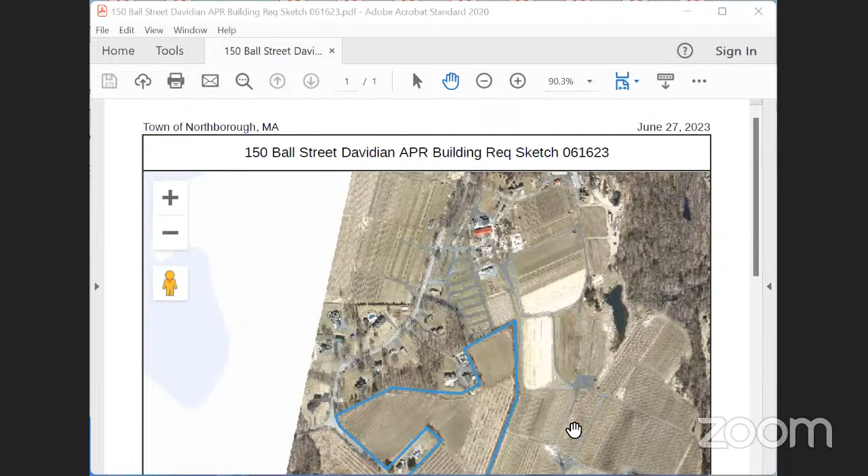Vinny's put up an aerial shot. This is 150 Ball Street coming in at the corner, and it goes up to their operations here where they have a greenhouse located in this area. This picture was taken before the greenhouse was installed. But this is their operation there, and they're proposing to put it in the red square area.

That's approximately the appropriate size, being 60 by 100. And there's no wetlands - there's a little wetland down here, but the scale is 500 feet to the inch, so they're more than 500 feet away from any wetlands. There's a stream down in here, but it's not an issue at all. And the property within the APR is highlighted in blue.

Or one of the Michael properties - Davidian's raised his hand, sorry Vinny, Michael Davidian's raised his hand. I'm bringing Michael into the meeting also. Okay, so that's basically it - the blue area is one of the parcels. There's APR on the property to the south as well, but this is the one that they're talking about, referenced in this request to build the packing facility there.

So it's a building associated with an agricultural use, so it's allowed on an APR, agricultural preservation restriction. The commission holds the restriction, so they need permission from us before Department of Food and Ag will authorize the grant or loan, whatever it might be. Okay, good, so there's no resource impact, area impact - it's really administrative from the APR side, and Concom is holding it.

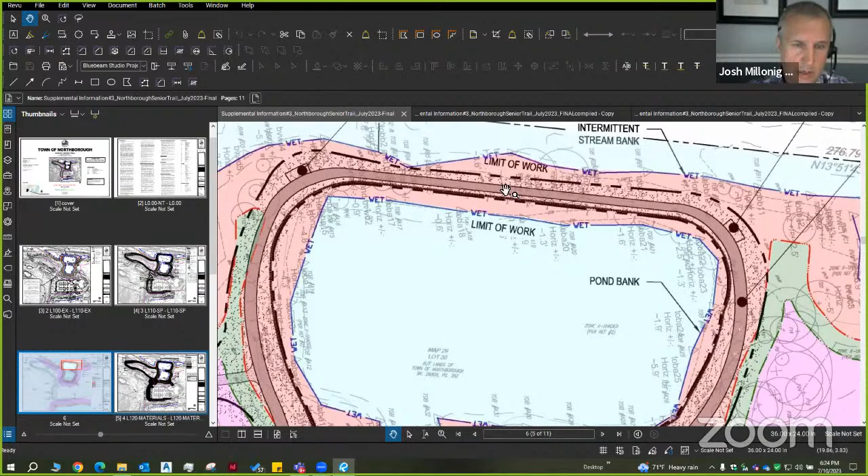I think that was a comment from the commission there. So we've reduced that down to 2 feet. And then also towards the left of this plan, Jeanette, where our stone dust pathway T intersections into the pavement path, we've pulled that out. It was creeping into the 35 foot buffer area. That was a comment that we addressed that came through the commission. So we were able to slide that path south, we'll call it, and pull the path portion of that out of the buffer zone. So we're just into the wetland buffer zone there with a little bit of regrading and some revegetation that's kind of spilling into the 35 foot.

We've updated our plans here. We understood that there was some confusion, they were a little hard to read with the various buffer zones here. So we just simplified it here. We have the red area, that's from the wetland flag, that's your 25 foot no buffer. The green is your 35 foot buffer zone. And then the 100 foot wetland zone is all the magenta there. So hopefully this helps clear up and helps to really visualize where we're doing a lot of our work there.

Another comment we addressed from the June meeting was to put slope indicators on our grading plan to indicate where we're pitching the water on the walking surfaces away from the resource areas. We have a couple slope indicators showing we're pitching those away at 1.5%, so any stormwater that falls onto the paved areas and pathway areas will be directed away from the wetland into the vegetation areas along either side and the shoulders, allowing it to infiltrate naturally into the soils there.

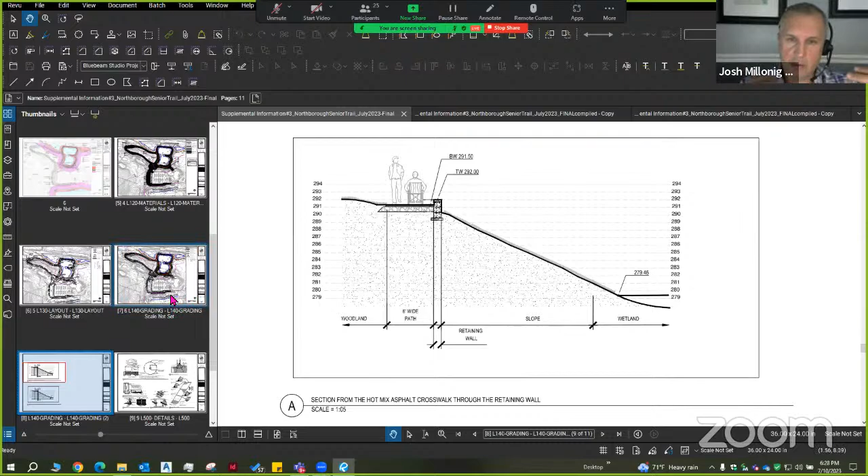We looked at this in more depth and cut a couple sections through there to verify that our walls are the minimum amount needed to really minimize the disturbance in this particular area. We looked at potentially pulling the wall and walkway back towards the parking lot area, but we felt that doing so would clip into the existing natural forest, which we feel is a good buffer between the parking lot and the wetland slopes, helping screen parking lot cars and lights from spilling into the wetland resource areas. For these reasons, we felt the current layout, wall heights, and slopes provide the most accessible pathway down while minimizing to the maximum extent possible the disturbance to the resource areas.

So we can walk you through some more of those questions. We did get another set of comments from Vinny about mid-afternoon last Thursday. Vinny, we've addressed those comments line by line, and I sent you some documents late this afternoon. It sounds like you might have just received them or maybe haven't, but we're happy to walk through those if that would be preferred.

Yeah, no, like I said, I hadn't had a chance to review it, but I think your summary was very good. I think it made a good description of where we stand. I think your—

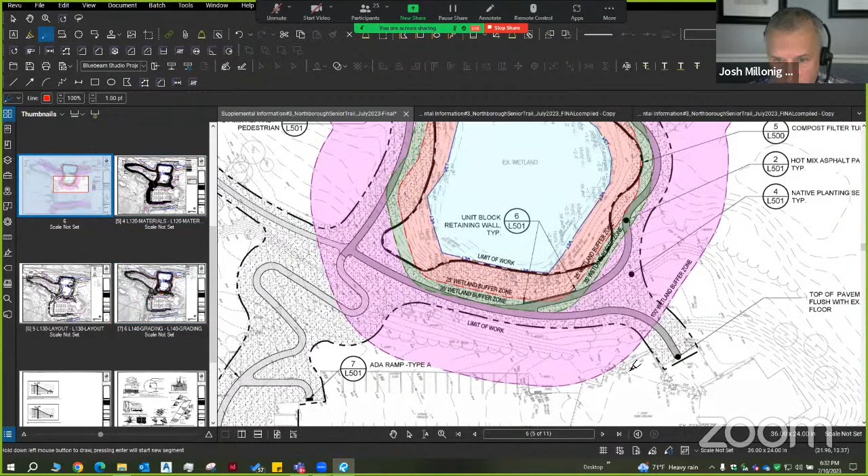How much encroachment are you doing right now in that area, inside the 25? We are regrading pretty close, about a foot or so away from the wetland flag line. We're meeting and matching the grades just outside, about a foot above where the wetland flag line is.

That's the area highlighted right now in the triangle. Yes, I believe so. You can see our limit of work line just kind of kisses just outside of the wet line that's shown in blue. So that's our limit of work, that's our limit of grading. I don't know, Jeanette, if it makes sense to flip back to the grading plan just to show the extents. We're meeting and matching that. I'm not exactly sure what contour line it is, but that one that's right outside of the wet line.

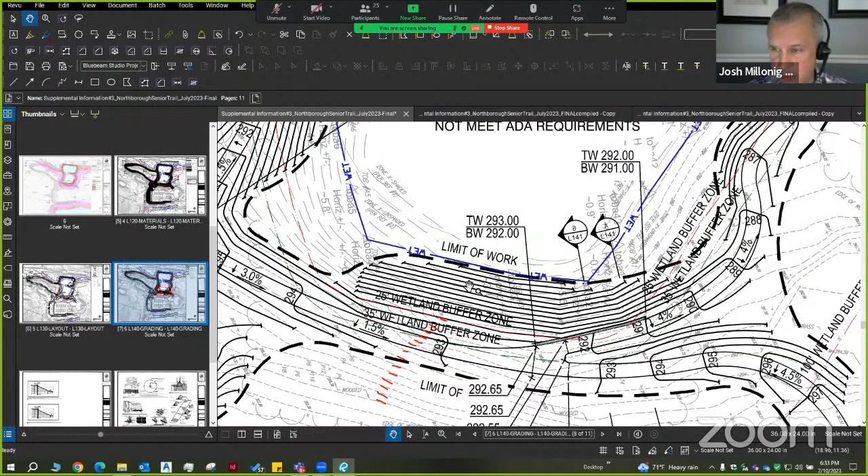So that's where we're meeting and matching existing grades. We're staying completely out of the wetland flag resource area. We're not proposing to do any work within there. All of our erosion sedimentation control is going to be outside of the flag line. We are doing this compost filter tube, which will remain in place in perpetuity. It's a seeded erosion control wattle, so that'll stay forever and just provide some additional sedimentation mitigation ongoing, and also provide more planting to help.

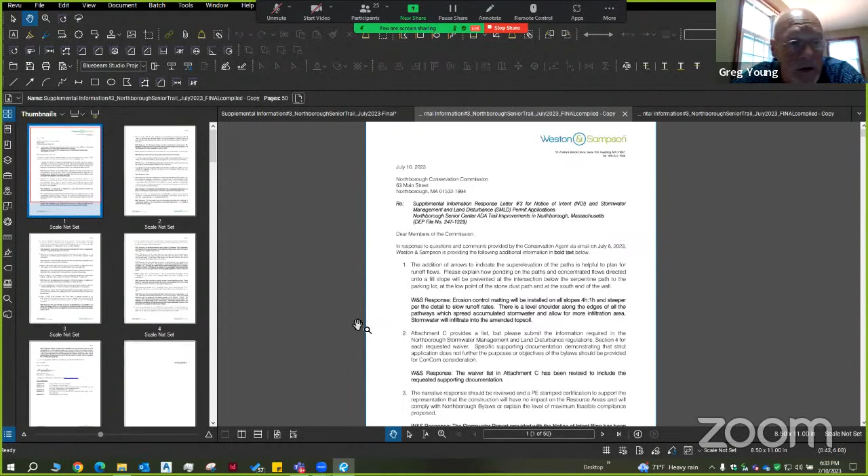Yeah, we do have the list of waivers. That was one of the comments, Vinny, that we were just buttoning up late this afternoon. That was part of the reason for our delay getting responses out to you. But we do have that list of waivers, it's in the latest response that we sent back to you this afternoon. It's an attachment, attachment C. If you wanted to scroll down to that, we provided more information, Vinny, that you requested, detailing a bit more reasons for support of this request and some more information. So this supplements the previous list that we included in supplemental response number 1, I believe.

How many waivers are you looking for exceptions to, or are you looking for? Quite a few, I don't know if I've counted all of them. You're talking like 20, 15, 26, whatever. I would say more in the realm of 5, 10, 15 waivers. We have waivers for both the stormwater and land disturbance permit as well as your Northborough wetlands bylaw. So we have a list of waivers for both of those.

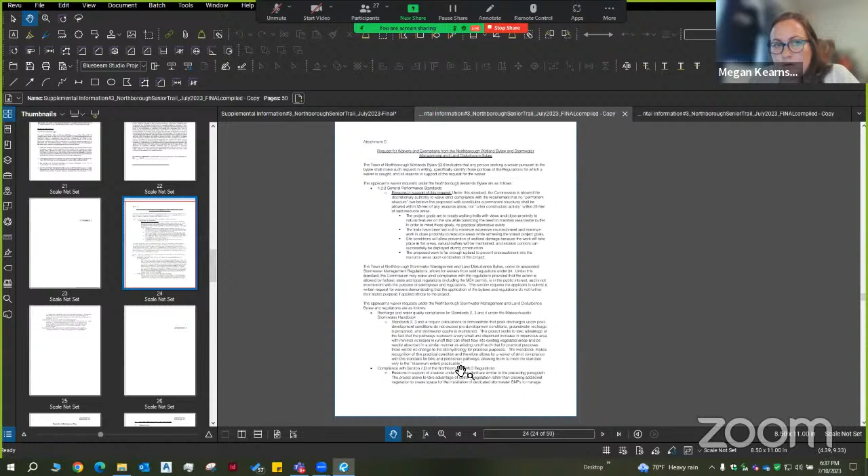Just want to make a note of that. Any other commissioner have comments on this? Do you want to move forward as it is, or do you want to look for a different approach?

I just have one question, Greg. On one of your plans, it showed a section of trail that was not ADA accessible. So I'm curious, my understanding of this was to create an ADA accessible loop around the pond, but there's a section that's not.

Through the chair: the loop around the pond, correct me if I'm wrong Josh, is ADA accessible. The loop up to the left that goes up the hill toward the cell tower is not ADA accessible - that's far too steep. But the intent and goal was ADA accessibility around the pond and around the parking lot. So while we were talking about the single switchback from the senior center rear patio that does a 180, if you look to the left there's a substantial switchback that maintains ADA accessibility. It's not what your plan says.

I'm sorry, Dan? It's not what the plan says. If you zoom in, you saw a section of trail that says this does not meet ADA requirements. That's the section highlighted right there - that is an 8%.

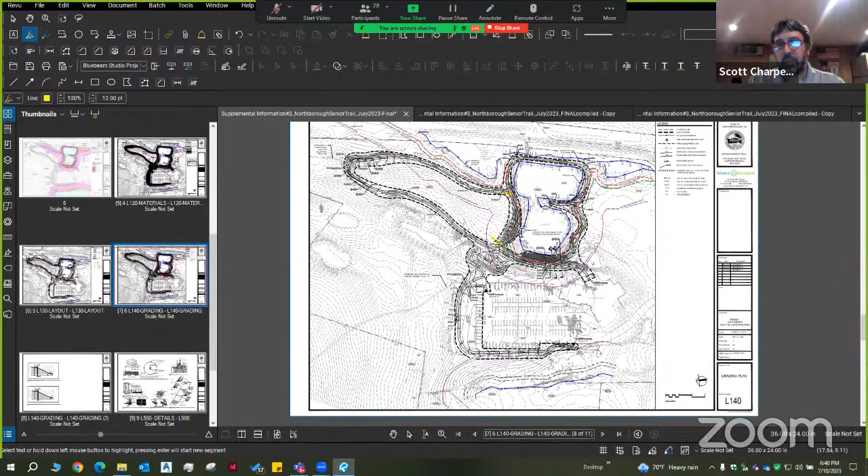Well, I guess my other point is, then why is that a trail at all? Why not just cut that out of the loop completely? Seems like a lot of disturbance unnecessarily. It's part of the original trail project that was presented at town meeting and part of the charrettes at the senior center. This is what the scope of the project is.

Yeah, but you could make it a single footpath that you could... We're not building a footpath. We're not building something that's not compliant - not ADA compliant, but not even ambulatory compliant. So it's part of the project. I don't understand the question.

Well, you have trails all over Edmund Hill. Right, correct - there's currently a footpath in that location. That's why you put it there, right? That was the idea of the original design. So why not just leave it as a footpath - the whole area that Dan is saying.

Okay, the whole area was laid out by the Trails Committee. A lot of it is already footpaths. At the end of the day, is there any reason for any improvements if all we want is footpaths? I'm not sure. Are we cutting out pieces of the project? No, it's already a footpath - there's already a trail there.

Okay, I guess Dan's question is, why do we need to improve something that's already there, particularly if it's not going to be ADA accessible? Why go through all that effort and disturbance when it's already a trail? We don't need to, okay.

So can we cut that out of the plan? No, I didn't say that - I'm saying it's not a requirement. I mean, it's part of the project, it's been laid out, it's been presented at town meeting. If we're going to start cutting out pieces of it, we'll reevaluate the necessity of the project, I guess.

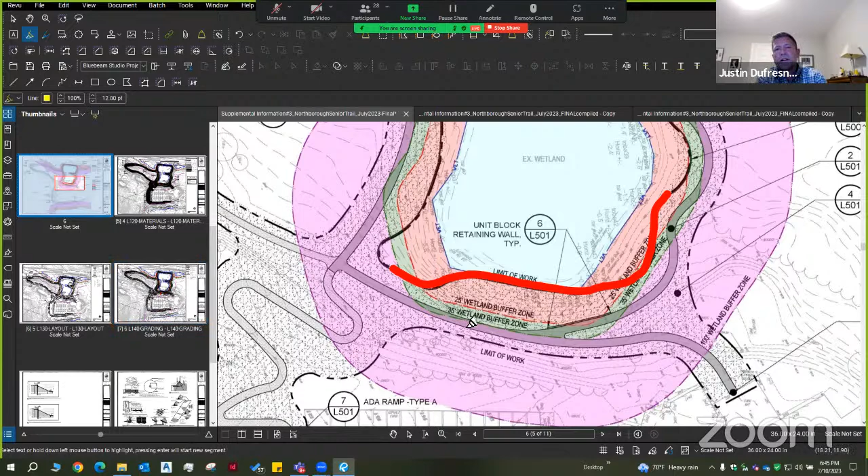So I don't recall there being very much invasive species out there. It was mostly nice wetland vegetation. It's a really beautiful wetland, so it'll be nice to be able to have the public go and walk around it and see some fish. I think I saw fish when I was out there last, so it's a really beautiful spot. I don't recall seeing any invasive species while I was out there.

So which I think Megan, what are we doing with that slope for revegetation? Is it just getting like a mix, or are we planting, like plugging any plants there, or putting any plants along that new slope, or are we just going to kind of armor it with a little bit of, I would assume, some type of erosion control mat or something like that, and then it just getting some mix? Yep, I believe we're, correct. Yep, sorry, go ahead, Josh.

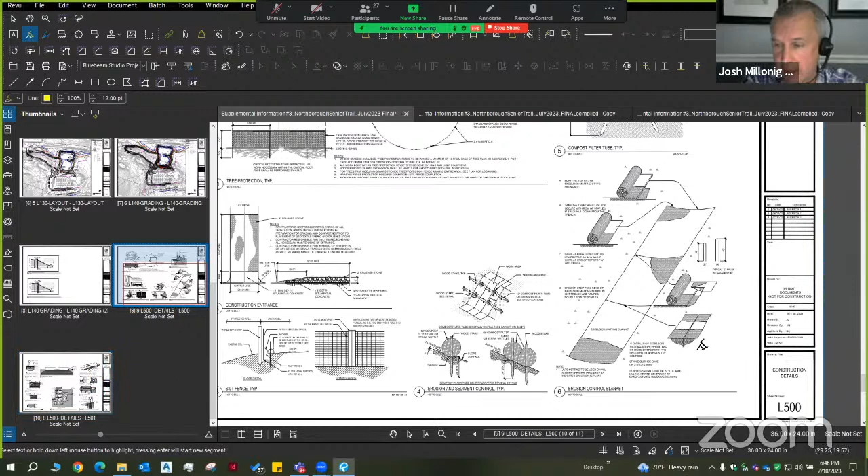Yeah, I was just going to say, our standard detail is slopes greater than 4:1 will get a jute mesh matting and erosion control blanket of some material that'll be staked down. We have some wattles that'll get installed at a periodic interval going down there. But the vegetation is a restoration seed mix that we're going to get from, you know, New England Wetland Plants or something similar, that's appropriate for this particular area. We want to get something that's going to germinate quickly and revegetate as fast as possible, but also provide some sort of wildlife habitat to birds and insects and things like that.

So it's strictly just a seed mix. We can get seed mix that do have shrub components into them, so we can add that into them.

Just the native, this is kind of our typical detail there. We're going to have an amended loam, 6 inches, but we also want to scarify the subgrade to provide a good interface between the two, break up any potential compaction between the layers to allow more infiltration into the subsoils.

But any of these areas that are over 4:1 will receive an erosion control matting blanket. You got a materials sheet, and I didn't see anything called out on the materials sheet where that matting was going to go. That was one of the questions that I had.

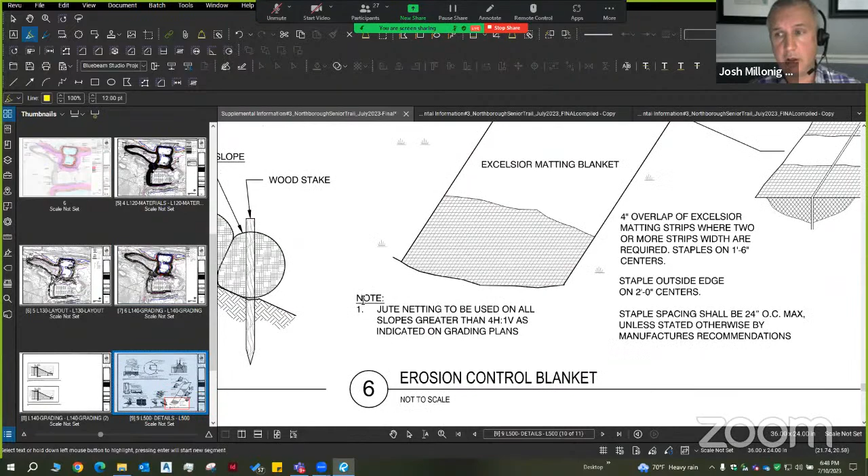Yeah, we're relying on the detail to show all the places that are over a 4:1. We have it noted greater than 4:1, so it'll just be a coordination item that the contractor has to look at the grading plan and know where we have areas that are greater than 4:1, and he was required to

put his erosion control matting on those areas. Okay, so the materials plan doesn't reflect that? The materials plan does not reflect erosion control. That would, on our demo plan, our site prep plan, show the areas that we're removing vegetation from, but we don't call out where the matting's going to go.

We do show where wattles go, or silt fence, or catch basin type of protection, those type of things, which we don't have any catch basin or protection on here, but just in general, that's typically how plans are shown.

Okay, and you mentioned the silt fence. Where's the silt fence going to go? You have a detail for the silt fence and the wattle. Is that shown somewhere on the plans?

Yes. Because they weren't on the previous one. I'm just not sure where it would go. Yeah, so previously we had the wrong call out there. We've adjusted the call out. It's going to point to detail 3 on 500, which is the wattle and the silt fence.

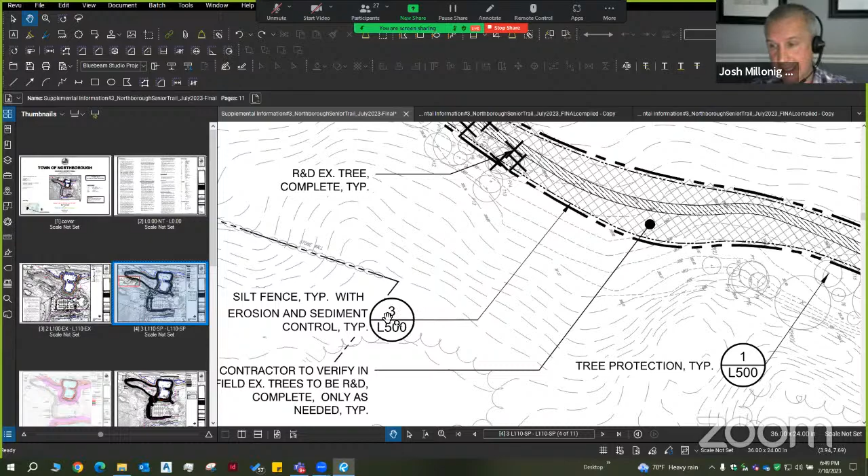So that is our kind of dash line. And then we also have kind of a belts and suspenders happening around the wetland area where we're going to have the 12-inch wattle that will remain. And then just uphill from that, we would have the sediment and wattle fence.

I believe that was one of the comments from our June meeting, was having a wattle with a silt fence is a good visual indicator if there's any excess erosion happening and it's starting to build up on the sediment fence. It's an easy visual thing that the contractor can go walk by and see.

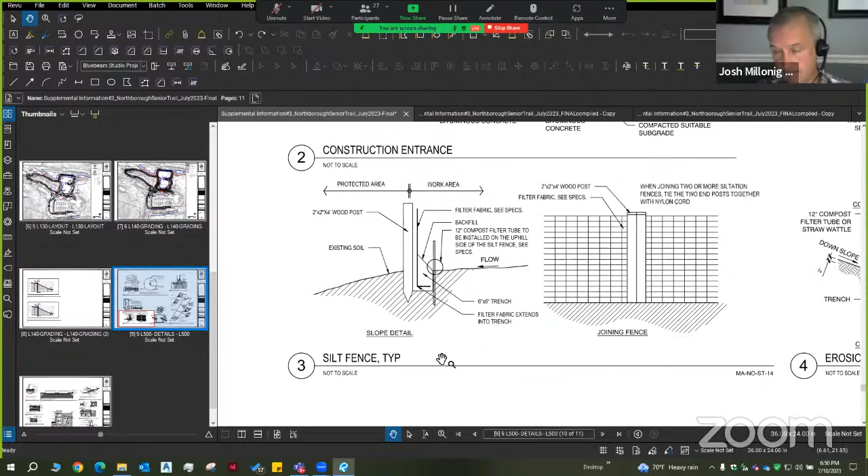But on the downhill side, we would have another wattle that we would remain after we pull the sediment fence out. We'd have another wattle remain. Okay, I just wasn't sure where that was shown on your plan, so as long as it's been clarified on the new plans, that's good. Yep, it should be shown.

Okay, good. Can we go back to the wall for a second? We talked about earlier up here in front. Justin, last month, I remember you had some concerns about or suggestions about that wall.

Yeah, I know some of my thought was, you might be able to extend the wall, maybe limit some of the grading. I mean, also potentially, pull the trail a little further away. I think Josh kind of touched on that we'd end up probably removing some larger vegetation in there that we might not want to. And I think I remember that maybe from the last meeting where we talked about maybe trying to pull it away.

And I'm looking at the aerial right now, there is a good amount of trees in there. So it looks like, yeah, maybe the further we pull it away, the more we're going to start to impact those, which I don't think we really want to do.

Yeah, my only other thought with the wall is, maybe it gets a little higher. Maybe that saves you from having to grade all the way down the slope to the edge of the wetland. But it seems like maybe you folks looked at that already and it doesn't save you much as far as the grading goes, and you have to dig down to put the foundations for the wall and everything in. So once you start doing that, are we really saving anything? Maybe not.

And then we kind of have more of a fall hazard once that wall starts to get a little tall. So talking through it and looking through it, I think we've got a pretty good approach here. I think the biggest thing is making sure some of that vegetation really takes. It's going to be a pretty steep slope heading down towards that wetland, so we need stuff in there that grows really quick. And making sure that jute netting stays in place and does its job - that'll be the thing to keep an eye on.

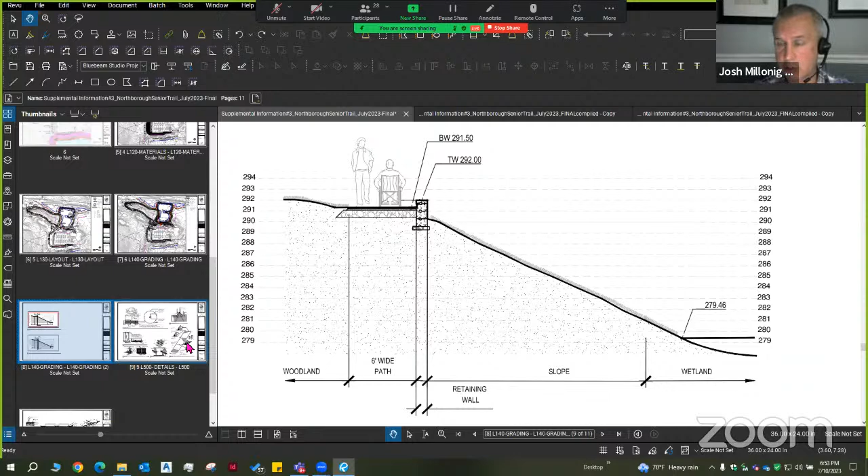When I looked at this plan you've shown on the screen, this section, I didn't see a line - what's the existing grade look like out there? Is it just not shown somewhere? The idea of what Justin was asking about was on the downside of that wall, making that wall a little higher so you don't have to grade all the way down to that number, 279.4, so that hopefully you could catch the existing grade before that. I can't tell what you need or what you can do without having the existing grade shown on the cross section.

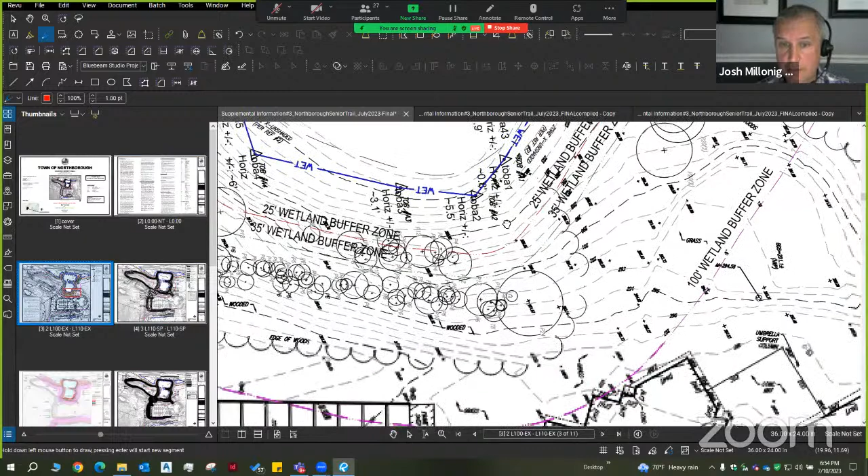Yes, we did not put the existing topography on there, but currently it's a steep slope to begin with. It measures out around 3:1, getting a little steeper than that. I'd have to double check the actual grades, but right now it is a fairly steep slope to begin with. You can see it in the existing conditions plan here. We do have some trees noted on there - there's a lot of trees down slope as well as upslope.

So it's not a lose-trees-or-not-lose-trees situation, but the other thing is you've got a steep slope running almost parallel to your slope coming off that proposed wall, so that if you could make the wall a little higher, you would be able to catch it a little sooner and not be right down to the edge of the wetland. So that was the question - why wouldn't you make that wall a little higher? Is there an ADA reason, was the question that came up last time?

I wasn't sure. As far as ADA, we touched on the height differential and getting a 4.5% slope down in there - the math works out to a certain amount of run. So this area where the wall is, we did take a look at what if we extended the wall, made it taller, and pushed the slope on the bottom side of the wall down more. How much would that save us? Once you start getting fall differentials higher than 30 inches, you're required to have a guardrail or handrail in there, which, if we're starting to get a bigger wall, putting handrails down with 4 foot deep footings to meet the load requirements on those handrails and guardrails becomes a larger disturbance in this particular area. So for those reasons, keeping the wall as low as we possibly can is the better overall solution for this particular area, since we're so close to the wetland areas.

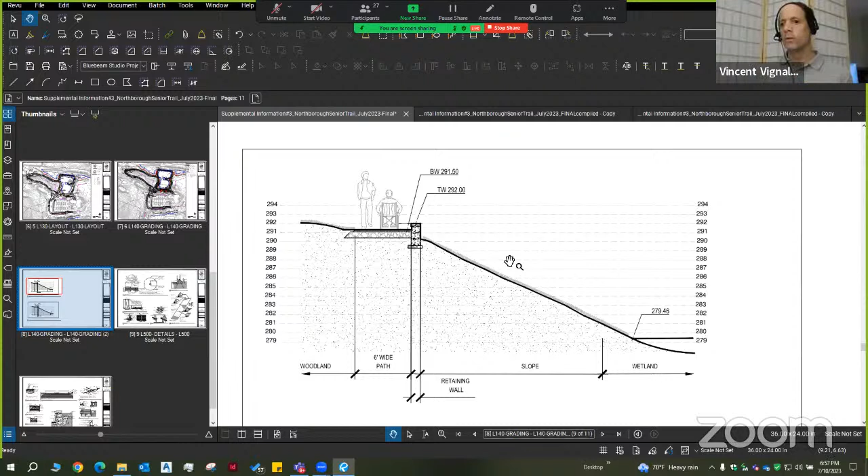We have, yes. So you don't need a railing when you've got a 2-to-1 slope off the back, as long as it's not more than 30 inches. Correct, we don't need a railing there. We're keeping the wall as low as we can.

Now the wall is one of these Versa-Lok block walls that you can just hand install. So that's a lower disturbance type of material that we're proposing here.

If we're looking at this particular section, thinking in 3D as the pathway is coming towards you, that pathway is dropping also, going downhill lower and lower. So as the path goes down, we're going to be stepping the wall to mimic that grade, so it's not sticking up the whole way. It's going to step as the pathway goes lower, if you can picture that in your mind's eye.

These two particular sections that we cut are at the highest point, which is this bottom one. This is the most highest wall differential we'll see, cut right at that top switchback. The second section we cut is at the end of the wall, right where the wall ends.

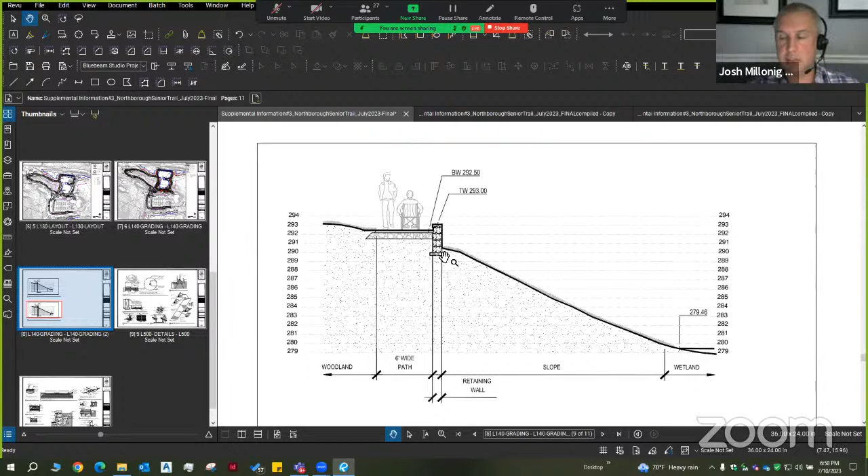And then we can just go with natural grading along the side of it. But yes, Vinny, we do not need a handrail or guardrail here. We don't need a handrail because it's not steep enough to require one, and the drop is not high enough to warrant a guardrail to prevent falls.

Josh, how tall is the wall going down? Is it 1.5 feet, am I reading that right? This particular one... I can't tell, Jeanette, you're too close in. So that bottom of wall is just under 291, call it 290 and a half.

And the top of wall up at the top where you're walking is at 292, so you're around a 2-foot drop right at that particular area. Again, this is the most severe point of the wall, and as that walkway goes downhill, the wall and that height differential will get lower and lower.

Second question I have is on the other side, on the far side of that second pond, the existing path is very, very close to the wetland. I think you've shrunken it down from 6 to 4 feet width. Correct.

What about mitigation for runoff, trying to avoid it going into the pond, especially on the side facing the pond? So on that particular area, we skinnied this down. We do want to pitch water, so we're going to crown the pavement there.

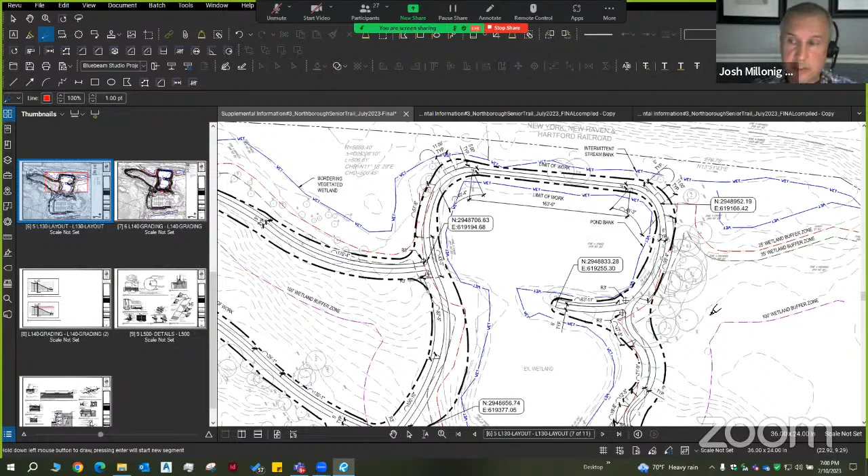We'll be sending water to the left and to the right. We're going to have a wide shoulder. It's fairly flat in this particular area, and we're not proposing major grade changes. We're really trying to follow the existing topography as much as we can. We just need to excavate to get the base and pavement section in there.

But we're intending that water will just flow off to the sides and slowly infiltrate into the shoulder and the vegetation on either side of it, as it kind of currently happens right now. Just trying to meet and match the existing conditions there.

But a 4-foot wide pathway is your minimum ADA requirement width to get people from these 2 points. We do have 2 turnaround areas where we have benches, over on the shoulders here, with some seating areas, so that will meet the turnaround requirements for an ADA path with a 5-foot diameter circle.

So if somebody in a wheelchair goes all the way across there, counterclockwise around the path, they have a spot that they can turn around and then walk back the way they came. So we were able to skinny that down.

Vinny, what questions do you have? Do you want to go through the waiver request and work it that way, or what do you think?

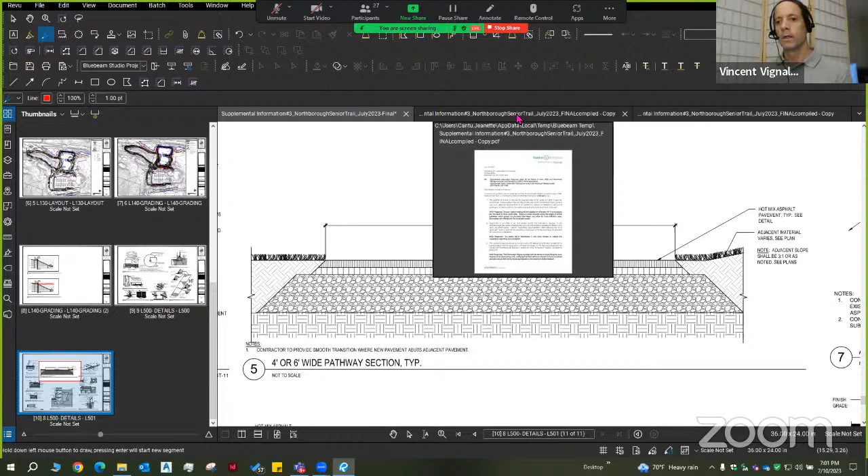I'm not sure what questions have been answered, so it might be more of a waste of time of the commission. The big questions are just the idea of the location of the paths, how much grading, and I think it sounds like the commission is okay with that. We just need to work out the details.

My concerns were more the idea of during construction, how are we going to have temporary sediment controls? I didn't see anything with that. And the other thing was they proposed the new grading, and I saw that, but I had a question that didn't seem to get addressed in the first couple of answers in the response that I read this afternoon.

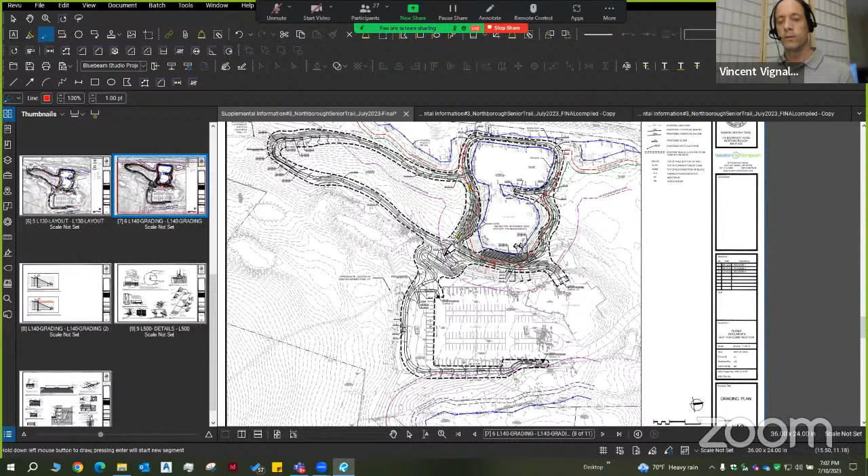I didn't get all the way through it, but if you want to pull up the map of the trails and the grading plan, the biggest concern I had was the way you have the water grading off the trail. It's going into that loop off to the south side on the left in the picture. You've got the grading shown from the pathway to be graded in towards the middle, so it's away from the wetlands, which is generally the thing that we would want to see.

But what that does is that directs it all down to the low point. And I'm expecting at the very low point there, down near the wetlands, you're going to have a lot of water that's being directed down. I assume there's going to be some kind of a channel along that pathway because it's multiple 100 feet of flow. How are you going to address that crossing at the low point there?

So that's the areas that I'm really concerned with, not so much like on the right side where you're just sending it off into the duff layer. That's a good plan.

Yeah, I think for the most part, like I said, we have the erosion control matting on everything that's over a 4:1 slope. So most of this site, most of this area around the wetland pond is going to have the matting. And then around the wetland pond, we do have that double layer.

We have the 12-inch wattle that will stay. And then upstream from that, we have the wattle and sediment fence. So you kind of have 3 layers of erosion control barriers between any disturbance that's happening uphill and before it gets a chance to even get to the wetland area.

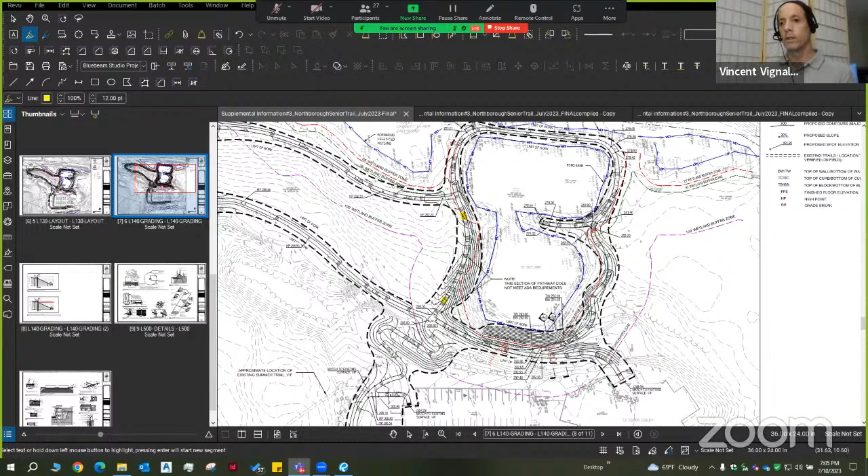I have a suggestion. Hello, Tom Beals. Yeah, just for general rain control during construction, regular hay bales could be stuck in, if you're going to have an overnight rain event or what have you. Standard, we don't have to go to straw bales or anything like that. If there's 25 or 30 standard hay bales that can be staked in, every 6 or 8 feet, on those slopes, just to control the water flow and not have a washout, I think that would be appropriate.

Yeah, it's not impossible. It's just that it's not proposed yet. That's all I'm saying.

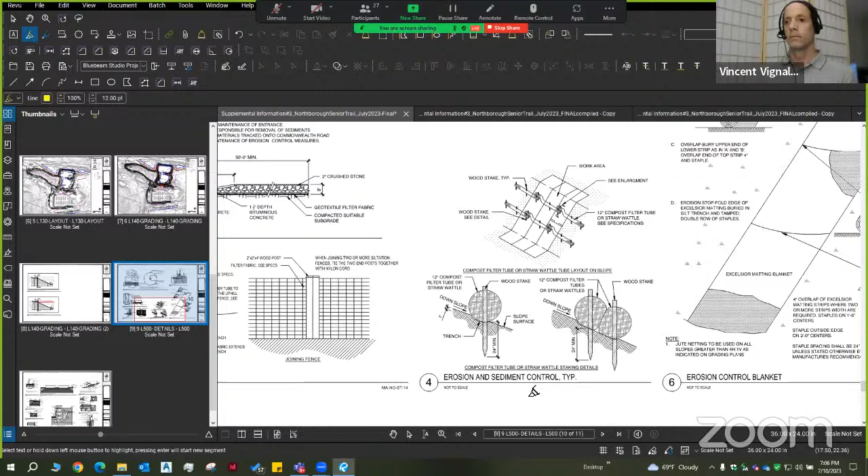Is the commission looking for this proposal to be shown on drawings? In past experiences, particular items like this that are more field-related, as things arise, are typically handled on site on an as-needed basis, where the contractor knows this particular area is prone to being washed out. We're concentrating water right here. We will typically talk with the contractor as they're building things to do some of these temporary solutions.

I like the straw bale idea, or extra wattles. They keep an extra amount of wattles on site all the time. It's required, it's in our spec, just in case something happens as a blowout, they have extra material to immediately address any erosion.

But typically what I've seen in past projects is these particular areas, when they happen and we find out about them during the construction process, we can armor particular areas as needed. But it's kind of hard to show them on drawings at this point, when things could potentially move or phasing of the project might change.

So I would like to address it, I'm just trying to figure out the best way to do that. Our stance is we have our standard erosion control details, and it outlines where the contractor is responsible for these things, but also he is responsible for maintaining the site and preventing erosion as a blanket statement throughout the site. It's his responsibility to maintain the site.

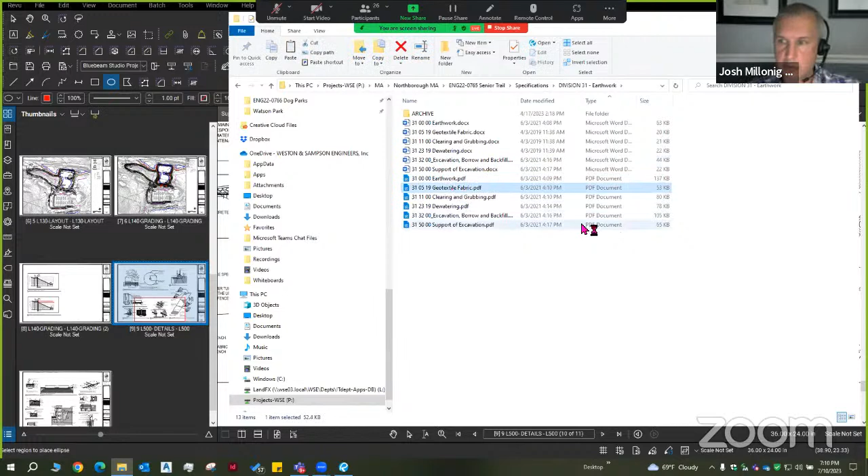You're going to want to see where the erosion control is going to be installed, limits of grading, limits of work, trees that may or may not be cut down. There's a whole list of things that will happen and documents that will be provided to the commission prior to the contractor even getting a shovel into the ground.

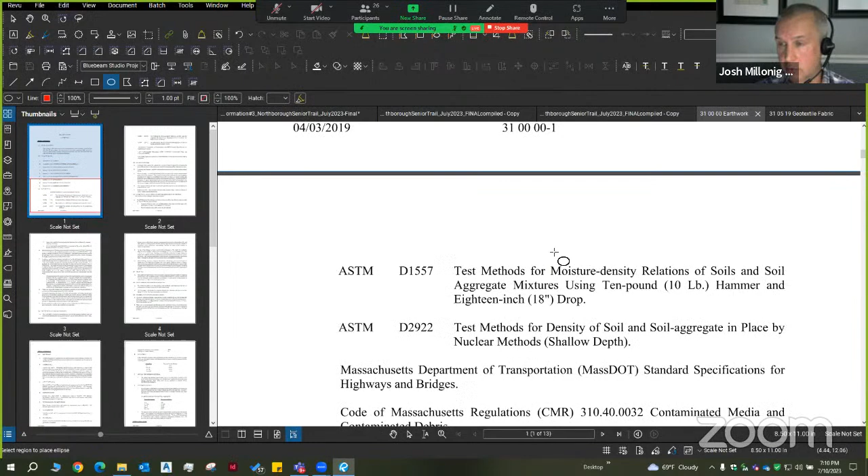So we have all of those. They're not required by the commission to provide, but we are working through those, and that's just part of the bidding process. I hope that answers that in a nutshell, Scott. Thank you, Josh.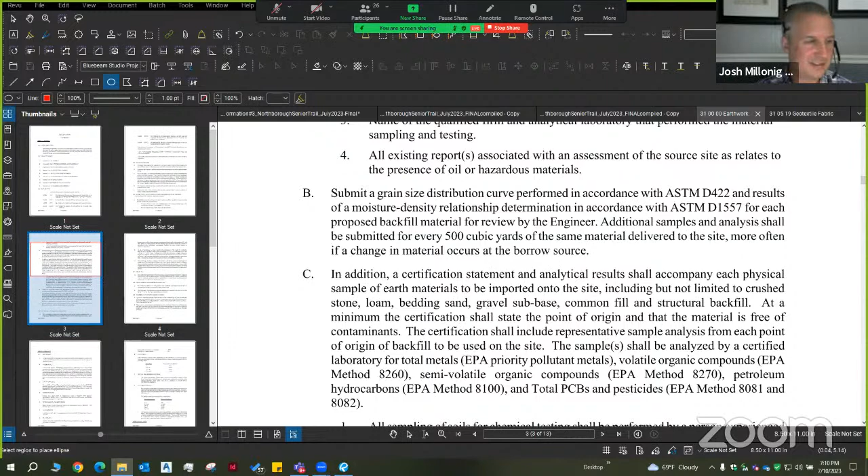Who's going to manage the contractor - you guys, or is that done by another party? The construction project will be publicly bid out by us, Town of Northborough. We have engaged Weston and Sampson as our construction site representatives. They'll be out there periodically doing inspections, as I will be. I know Vinny will be popping by, and I believe we're going to have a couple dozen up to 100 seniors out there looking at the parking lot constantly at the construction project.

But Weston and Sampson is responsible for submittal reviews, construction observation oversight, reporting, and pay requisition reviews. So there's a lot of eyes on this project. Yep, correct, thanks Scott.

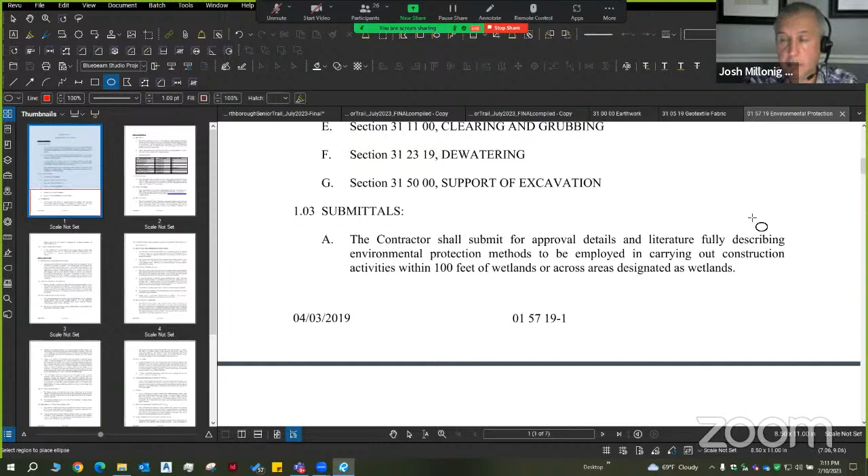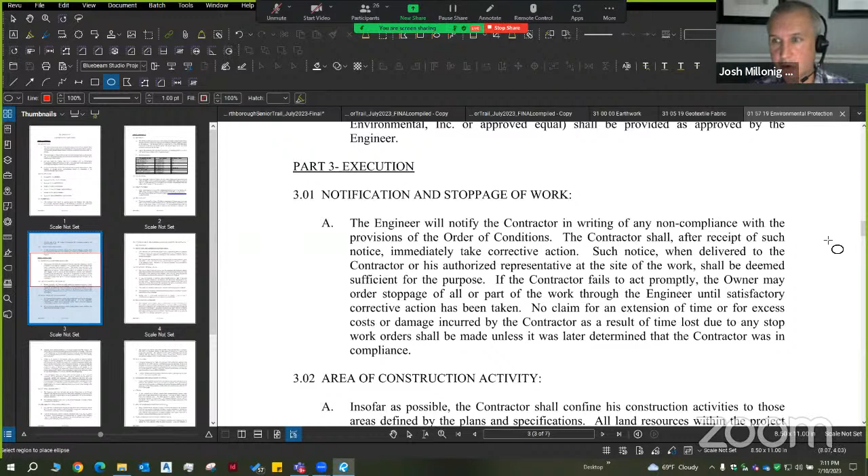All the submittals will come through me. I will review them, compare them to the specifications we are writing, and then compare any work that's phased in their work plan. We'll see how that matches up with the order of conditions and any other specific items the commission wants to put into that. So yes, Weston and Sampson will be on site, there'll be regularly scheduled meetings on site, virtual. Like Scott said, we're involved, we're around, we're reviewing, and we're looking at everything.

Vinny, how are you feeling about this? It sounds like he's doing work and he's gotten some stuff completed. I just don't know what's completed enough, or if the commission is okay with what they're submitting. I haven't seen the revised plans. They're going to come soon, I think.

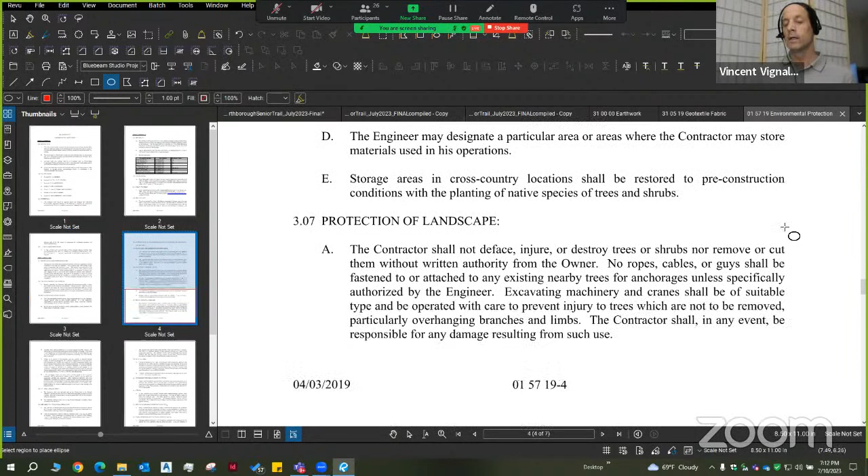I got a response to comments letter, and I got kind of halfway through a 50-page document, but I didn't quite make it. I think we can work through anything. I don't see any major issues besides the drainage and how to deal with that flow when it rains.

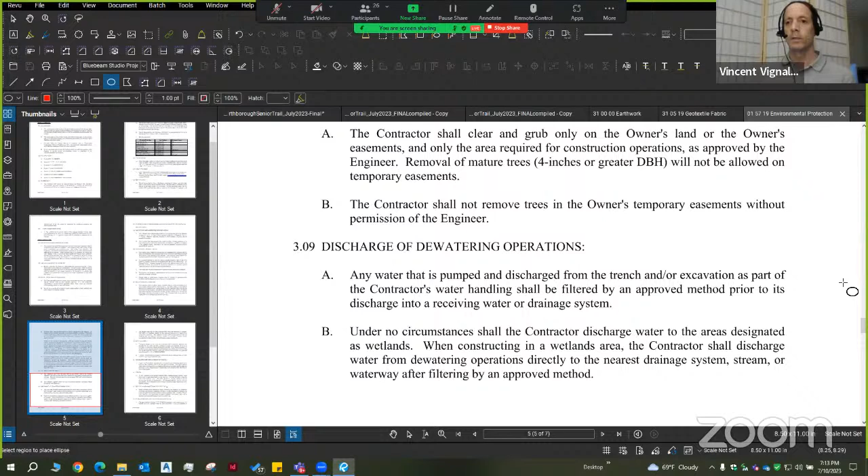Because what the comment was is when the contractor's out there, he sees where problems arise. I want to try to get it before that situation occurs, so that I don't have to deal with wetlands that are impacted or the pond that's slushy or sludgy. But it's up to the commission on how they want to proceed.

Okay, my personal feeling is that there's questions to be answered still. We received a big document late in the day of the meeting that hasn't been reviewed yet. We need a plan that's updated, and the answers are, well, we'll deal with it on site, we'll deal with it when it comes up, which doesn't sit well with me based on previous experiences with the contractors in the town of Northborough.

One of the challenges we have on public procurement is that there's a line somewhere between tying a contractor's hands too much and costing undue expenses to the residents, and giving them way too much rope. What Vinny said is a hill washes out into the wetland, and I think that's where we're trying to identify where that line lays.

Correct. All right, any questions? Let me see if we got any public comments here. Do we have any? I guess last one from me too. Go ahead, Justin. Disturbance is probably over an acre for this project, right?

Do they need to file an NOI and do a SWPPP through the EPA? Yes, yes, we do. Okay, so we've got a little bit of coverage there, Vinny, with the SWPPP document and the EPA, at least the NOI for construction too, that the contractor will have to abide by.

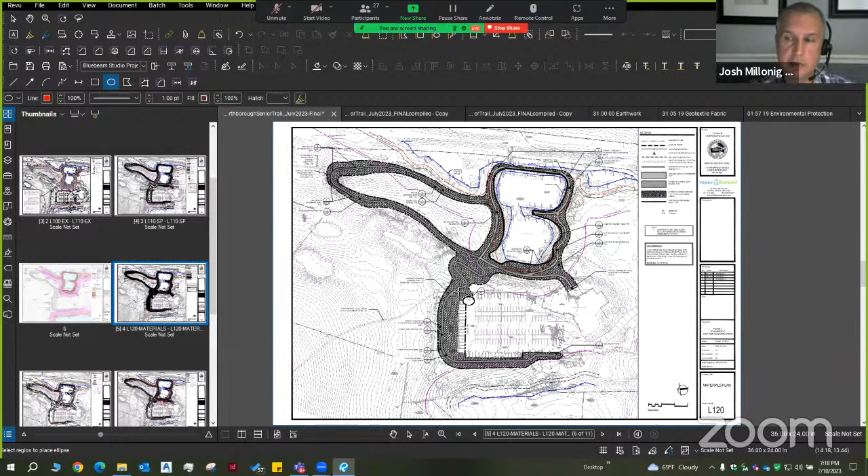Yes, I agree, there are certain landings, just to expand upon that. Every 30 feet you need a level landing. So it's more involved than just adding handrails along this section. We'd have to look at the lengths and runs and provide level landing areas, which would flatten out certain areas and potentially increase the disturbance in this area to provide wider areas. The handrails themselves need 4-foot deep footings to provide the lateral forces required for foundations.

So again, it's more and more disturbance happening in this area versus paving an asphalt walkway. But Tom is correct. Already the items Tom brought up are a risk to funding or to the use of the ADA compliant terminology. Any risk involved? We absolutely cannot afford handrails on an over 100-foot length of walkway. Handrails are 150 a linear foot on either side, so 300 a foot. There's absolutely no way the project could handle that. Correct, yes.

The trail layout system is ADA compliant. If we have a sign right at that T intersection that says from here on is not compliant, or the ADA path goes this way, we have a directional arrow to show where places are. It's a full looping system, so you can get to a place and have an opportunity to turn around and go back the way you came. So I don't expect this to have an issue with funding. It meets the MAAB requirements for accessibility.

Right, thanks Josh. Okay, any more questions or comments by the commission? In general, I think Todd brought up earlier too, this is a good project that the commission certainly supports, supports the concept of it. I think our concerns are around what the commission exists for, minimizing any threats to the resource areas there. It's a very sensitive area, a place where it's hard to work around. There's not some easy bailouts. I'd like to see it move ahead, I just want to make sure we're moving ahead with eyes wide open on that one.

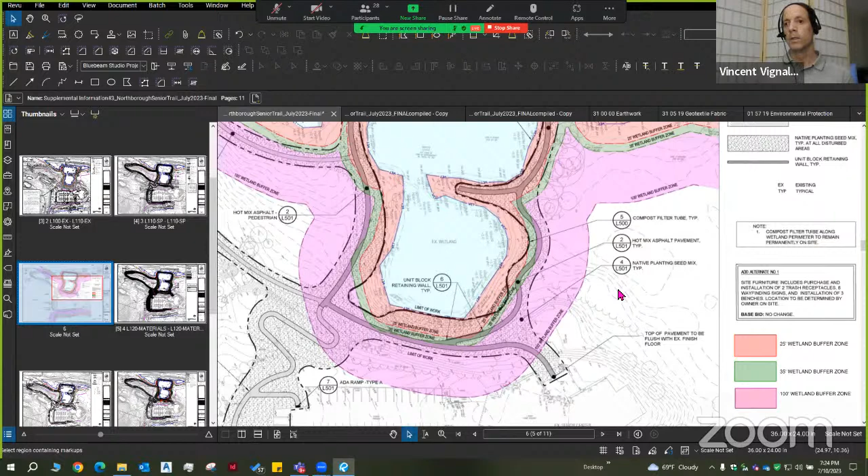Vinny, what do you think about continuing for a month and getting everything wrapped up? That's my preference a little bit. We'll have everything done, nailed down, and be able to go through it like you initially said at the beginning of the meeting—just go through and say okay, this has been checked, this is done, we've addressed that. Right now I can't confirm that everything is done. It could be perfect right now, but I haven't gotten the plans. The revised plans haven't been submitted yet. I think that's where I'm most uneasy, the same spot.

They've been working diligently toward this. The comments came in midday Thursday, so it's been about trying to get the comment response letter primarily first. I'm confident they'll be able to address all the comments of the agent before the August meeting.

Vinny, the plans are included in the attachment—they're attachment A, the first attachment right after that letter. They start on page seven. Okay, I didn't get that far. If for some reason they're not loading, let me know, I can send you a separate PDF, but they're all part of that—everything is in that package, in one place. Good, thank you Megan, we saw that.

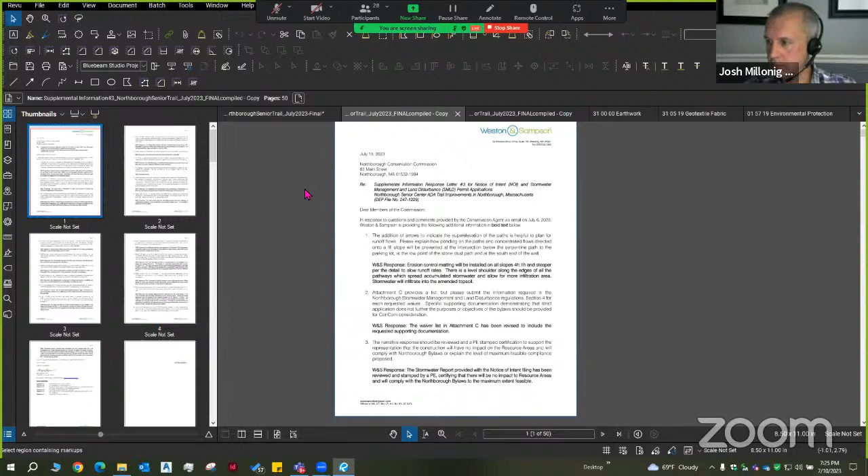So we're looking at continuing to the August meeting. Let's see how the commission feels about that. Is there a motion? I move that we continue the meeting to August to straighten out all these entanglements. Second, seconded by—was that Justin? It was Todd. A lot of people throwing voices today.

Okay, voting to continue the meeting to August 14th. Roll call vote: Dan Clark, yes. Justin Dufresne, yes. Diane Gildner, yes. Todd Helwig, yes. Tom Beals, yes. Greg, yes.

Members, are you pretty sure you're going to be able to make it for August 14th? No vacation issues? I'll be there. Wouldn't miss it. All right, as long as we got a quorum, that's what we're looking for.

All right, so August 14th—I would certainly hope that's the last meeting, get this thing wrapped up and move ahead. It's a good project. I'll make sure we have no loose ends. Thank you, Mr. Chairman. Thank you, Commission. Thank you, Scott. Thanks, folks. Thank you. Thank you.

Clean up. All right.

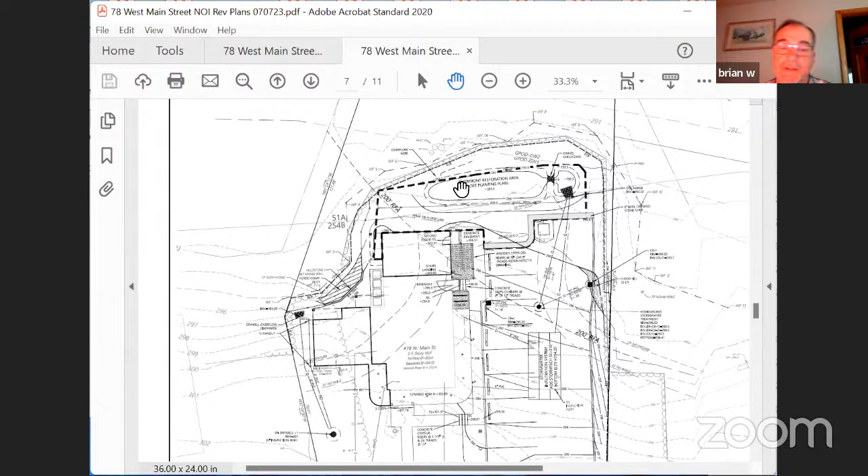So that's the riverfront restoration area. It's essentially still the rain garden. ZBA wanted a rain garden. They want a fence along it, which you see there, for snow storage protection between the end of the pavement. So this has incorporated ZBA comments as well, as far as their comments on fencing and snow storage and de-icing and things like that.

This plan has been updated significantly just to meet those. So now you can see we've added a second deep sump-hooded catch basin off to the left there. That goes into the Barracuda Hydroworks stormwater treatment unit. So both catch basins would go into there, and then the overflow goes down to that riprap splash pad.

And we've also increased the 2-foot wide stone strip and extended that along the entire edge of the pavement. That's 2 foot wide, 2 foot deep with a filter fabric.

And we've updated the stormwater management report, which was sent to Vinny. Obviously he hasn't had time to review that extensive document, but we've addressed the stormwater infiltration system there in the middle of the parking lot. Vincent, if you can pan that, that was rotated so that it's completely out of the 50-foot, or that's the 35 — I think part of that's still in the 50. We'll have to slide it. I thought that was done, but I guess we'll have to slide that farther up. Even though we're meeting the separation to groundwater, we did run a groundwater mounding analysis that's attached in the stormwater report showing that we're not impacting the groundwater.

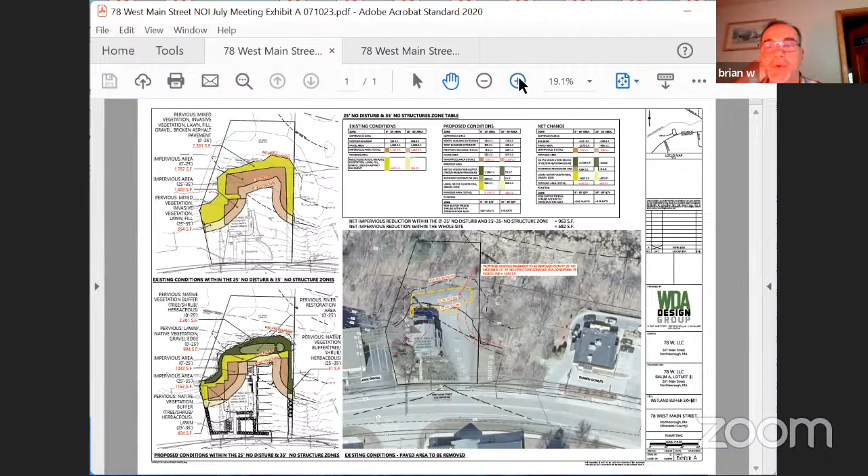Vinny, do you have the graph, exhibit A, that we sent today? I do. So Vincent, where would you like me to go? He had requested kind of a breakdown of the disturbed 25 and 35 that's existing now. Can you just scroll down to the aerial exhibit part on there?

So you can see the existing pavement runs down — like I said, it's within 4 feet of wetland flag, between 4 and 5 off to the northwest corner, and generally anywhere from 6 to 12 at the maximum. So that pavement is what's coming out. What's outlined in yellow is to be removed from the site.

And so that is the majority — you can see the 25 no disturb and 35 no structure. It's already historically been altered. Like I said, the original house was built in 1900. I'm not sure when all the pavement extended down to that area, but at least in the 60s and 70s. So you can see the existing house takes up most of the 25 and 35. So that area of pavement is to be removed.

The building — let's see, can you scroll out just a little bit, Vincent, please? Maybe.

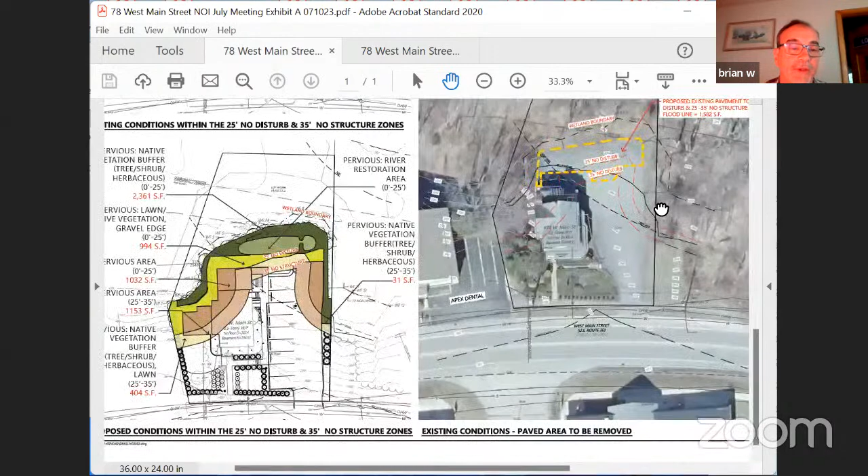Okay, off to the left here, this gives us the square footage. The bottom one shows the proposed conditions, and you can see the building addition.

That's the westerly building addition, going into an area which does not have pavement now, but is historically disturbed with fill and an old cesspool. The north building addition is actually extended into what is pavement now.

The yellow and green you can see there are areas that were revegetating upon removal of the pavement. So we would be restoring the majority of the 25 to 35 foot no-disturb zone in that area.

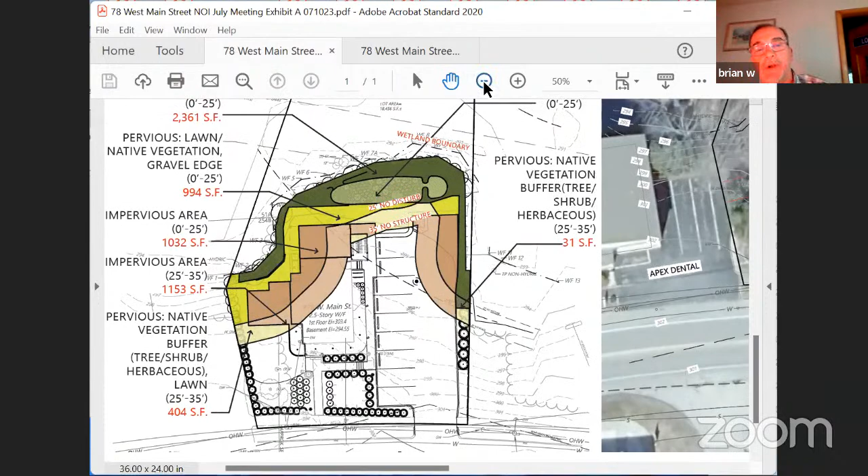If you zoom all the way out, we broke down in a table up there, as you had requested, the difference between the existing disturbed site, which is pretty clear in that left hand, and how much of the site is really disturbed now.

I know you've been out there. I think Chairman Young, you've been out there a couple times, Diane, yeah. I believe so.

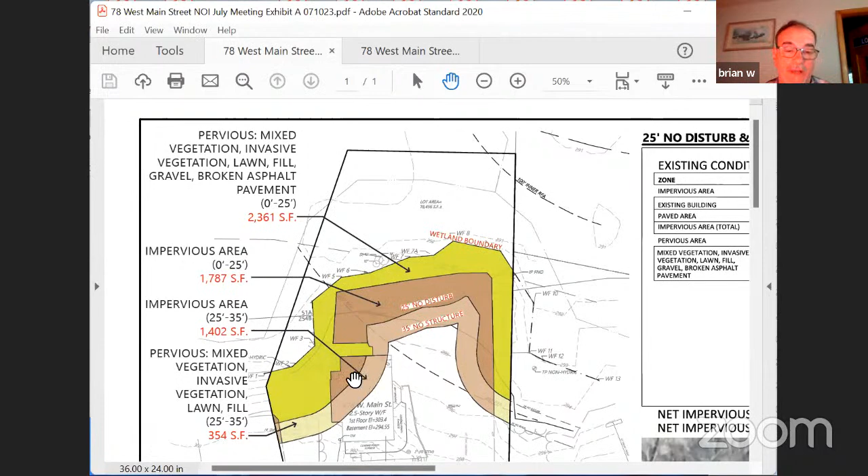So we do have the proposed addition in the north falling within an area that's already paved now. The westerly building, yes, it does extend - the closest corner is, I believe, 11 feet from the wetland flag.

If you go down to the bottom one, you might be able to see it in there. We can do it on the design plan - yeah, right there.

The north building is no closer than existing now. So the waiver we had asked for is because the majority of the work in the 25 to 35 foot zone is actually to remove pavement and restore things. So it's not an impact, it's an improvement.

The one area is the corner of that building that is within the 25 to 35 foot zone, but it's an extension. I believe Tom Reardon is the architect - given the historic nature of the building and meeting roof lines, and making an addition work to get families in here, I think that's part of why it's extended as it is, but it would still be a minimum of 10 or 11 feet from the wetland.

And we'd be adding - can you go back to the planting plan for one second, please, Vincent? If you still have that open. It was one of the earlier ones, yeah, right there.

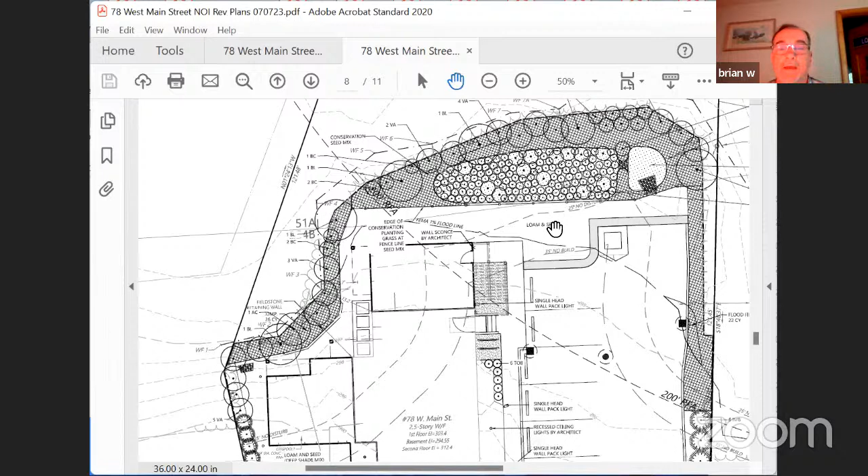So it's still essentially the same design - it's kind of a hybrid system based on our conversation with DEP and what we're trying to accomplish, trying to keep everyone happy on all fronts.

Brian, are you looking for a continuation? Is that what I'm reading into the minutes here? Well, I think there's no way around it - Vincent hasn't had a chance to look at our reply letter or the revised plans, and we sent a couple of things late that we caught.

We added some stockpile areas and a temporary sediment basin. So yeah, I think we're going to have to continue. We just wanted to get this open, get your initial thoughts or feedback if you want to take the time now, or if you all want to digest it and touch base in August. We're open to whatever you're comfortable with.

Well, let's see what the commission has for comments, any brief comments. Brian, in general here, you're looking to - the trade-off is replacing a lot of impervious surface with natural environments in return for encroaching into the do-not-build zone. Correct, which has already been encroached on historically, but we're improving the area.

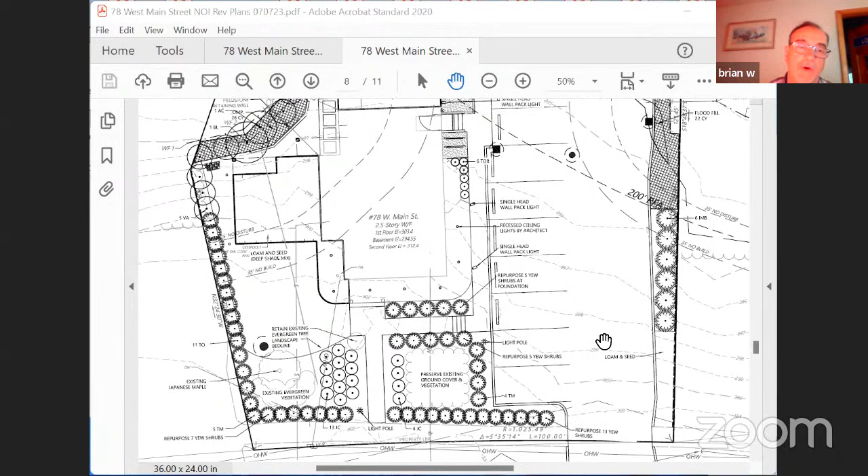Overall, we're removing 1,600 square feet of pavement. But there's some new pavement up towards the outer edge, up at the top of the driveway, which expands into the buffer zone. The entire site's in the buffer zone. So the net reduction overall is 582 square feet of impervious. If you add in the building addition with the upper parking area, the net reduction is still 582 square feet of impervious on the entire site.

Is that on the exhibit that you gave me? Yes, that's on that exhibit, up in the table. I believe it's up in the table, fully explained, and it's further outlined in our reply letter. Like I said, you can see that the majority of the 25 to 35 gets restored.

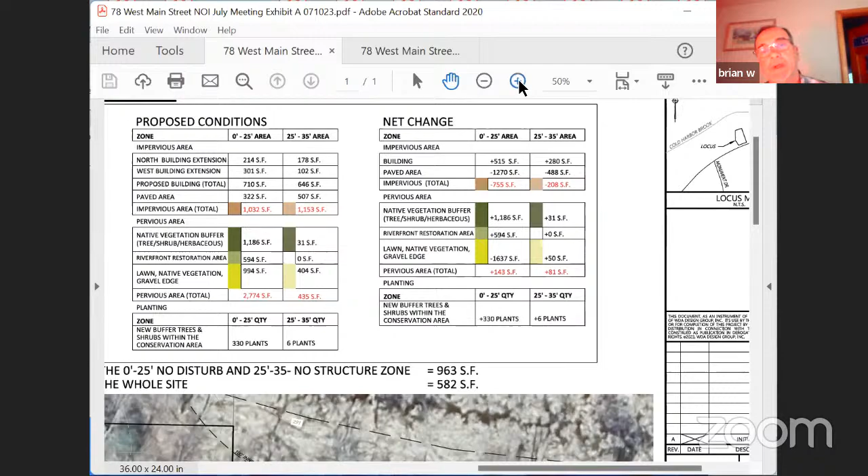We get rid of the pavement. We're adding infiltration for the entire roof, both the old roof and the new roof, where you currently have no stormwater controls on the site ever. Everything just sheet flows down the hill right towards the wetland. So the net benefit of infiltrating and restoring the buffer is what we're asking for, a waiver to allow that one addition.

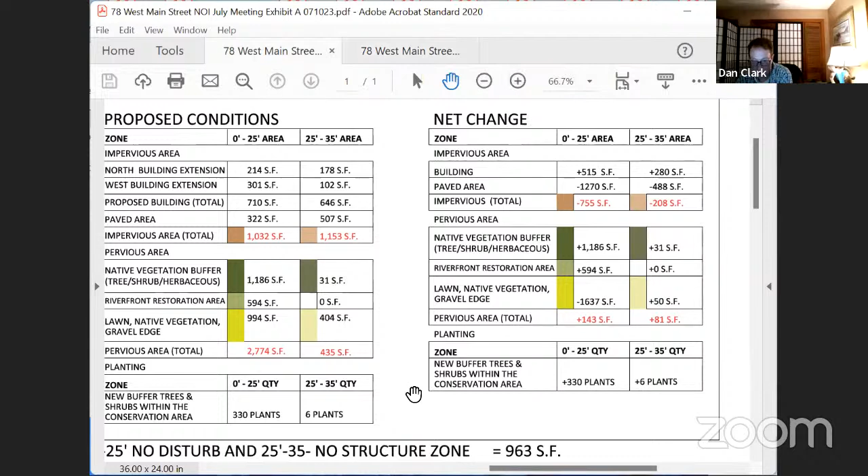Vinny, on that exhibit, right at the bottom it says in bigger letters 963 square feet. What is that number? It says net impervious reduction within the 0 to 25 and the 25 to 35. Net impervious reduction within the whole site is the 582 that he said. Right, and the net impervious reduction within the 0 to 25 and the 25 to 35 foot is 963. Oh, okay, good.

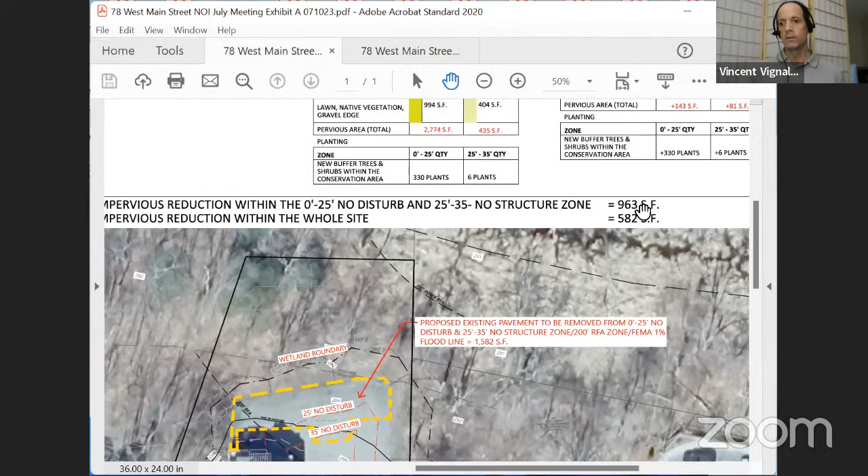My other quick question, what invasives are in that area that you're trying to get rid of, and how are you going to get rid of them? Garlic mustard, Asiatic bittersweet, reed canary grass, oh boy, I've got it here, I think there were 6 of them, multiflora rose.

Where did I put that? How are you getting rid of them? They'll be cut and pulled. Most of that stuff can be cut and pulled. If they need to do a spray, they would have to go through a licensed applicator and follow up with you. Most of the stuff can be cut and pulled, the garlic mustard, and then you'll be placing new soil and new vegetation to outcompete them. Hopefully.

The bittersweet is growing up some of the trees and has killed the trees, but they're either in the wetland or off our property, so some of the bittersweet we have no control over. We're going to do the best we can on the stuff we can reach on site between the wetland and our work area.

Unfortunately the bittersweet is climbing in the trees, mainly on the Dunkin' Donuts side, the back side of the site, into the tree you can kind of see in the aerial photo there above wetland flag 8. Yeah, there's some bittersweet up in those trees, a couple of them are already dead.

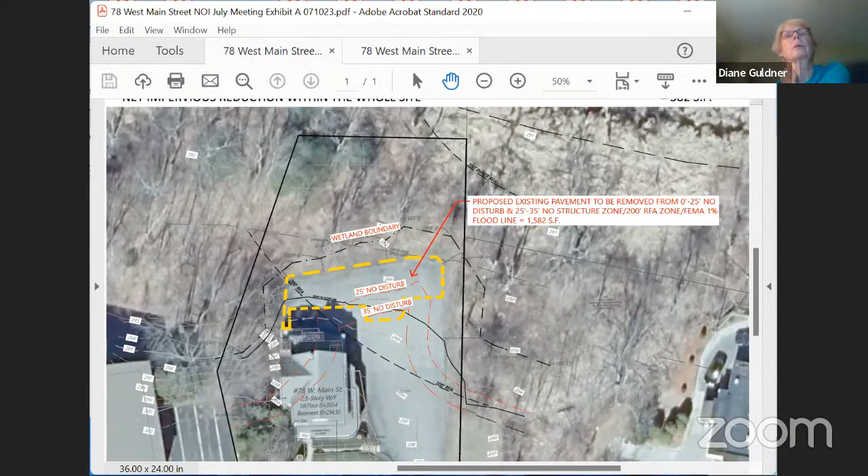Any other questions from the commission? When you're going into the driveway, is the water from the street funneled down that way, or is there drains there so it will go off? No, there is a high point, a bump there, so you have to drive up into this driveway before it drops down. The street drainage stays out on the street.

Okay, thank you. You're welcome.

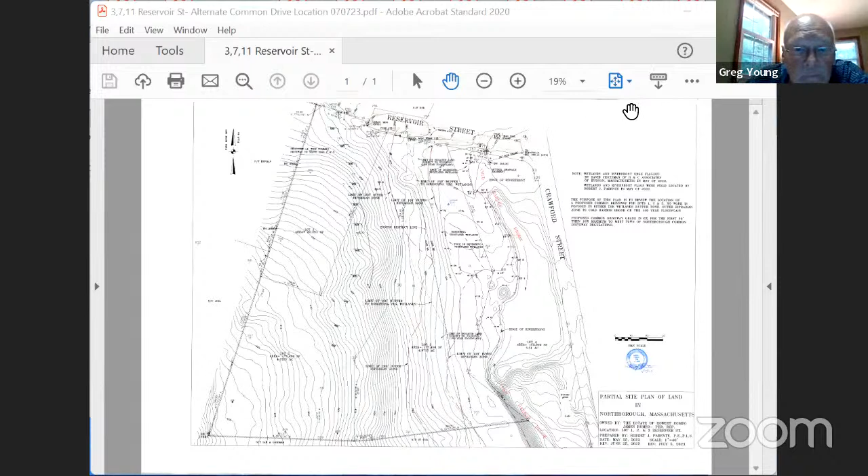And Ben, can you pull that plan up? I am getting there. Yep. Okay, thank you, I was making sure I didn't have to. Oh, Vinny's an expert at this stuff now. Yep, I know, it's kind of scary. Right, that's it. There we go. Can we make that a little bit, get a little closer maybe? I can, I'm having trouble with the Zoom screen, it's kind of impacting my access to zoom in. There it goes.

All right, so the property corner is right in here, in Reservoir Street. So there's a stone wall on the west side of the property. And originally I submitted a plan that showed a proposed driveway on lot 2, which is right about where Vinny has the cursor there. So the original plan showed a little bit of disturbance in the riverfront area, which is why I wanted to get the wetlands flagged and have the commission look at it.

But I met about two weeks ago with Vinny, and before Fred left, Fred and Laurie. And Fred asked me to try to present a driveway for the 3 lots together, which might be more economical anyhow, but it also is going to allow me to create an area where I can recharge some of the stormwater, right where Vin has the cursor there. So there's a natural low area there, which is about 2 feet lower than Reservoir Street.

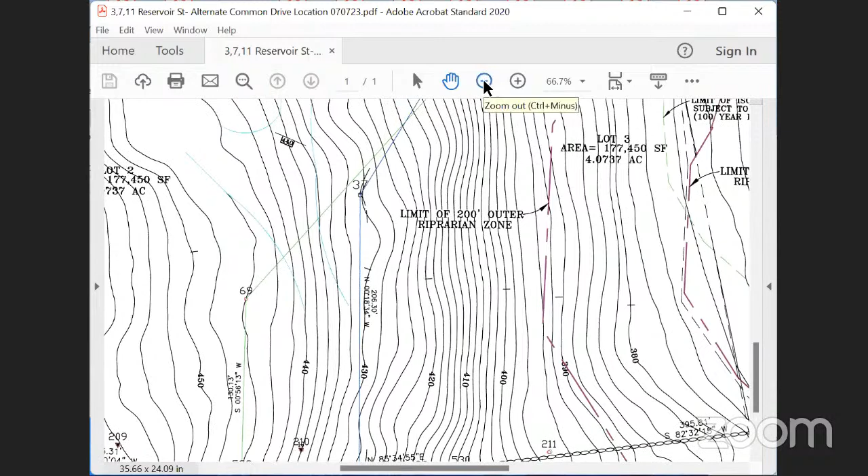Right now I'm not dealing with the existing house, which is Lot 4. I think I included that on there, Ben - yep, it's in the picture, but it's not in the application. The existing farmhouse is on Lot 4, and I'm not dealing with that at this point, with the brook in back of it. I'm not exactly sure what their thoughts are right now on that. I know it's in a little disrepair, but they'll have to figure that out further down the road.

Fortunately, I'll be coming to the commission because of the 1 acre of disturbance, Vinny - yes, under the bylaw, the disturbance bylaw. So I will be filing with the planning board and the commission once I get the stormwater finalized, the driveway a little bit more settled, and get some soil testing done. So maybe August, but more likely September.

So you don't need an RDA at this point since you're outside the jurisdiction. Correct - now that the town recommended one driveway, the powers that be... I think it's probably a better layout. I didn't think I could get the grading to work, but I'm at 9% all the way through.

Now it'll become more about what the fire chief needs for turnaround, and the planning board comments and all that. So Vinny, the RDA will be withdrawn and there will be a land disturbance permit coming in front of us at some point. Correct, yes, that's probably the easiest way to go about it.

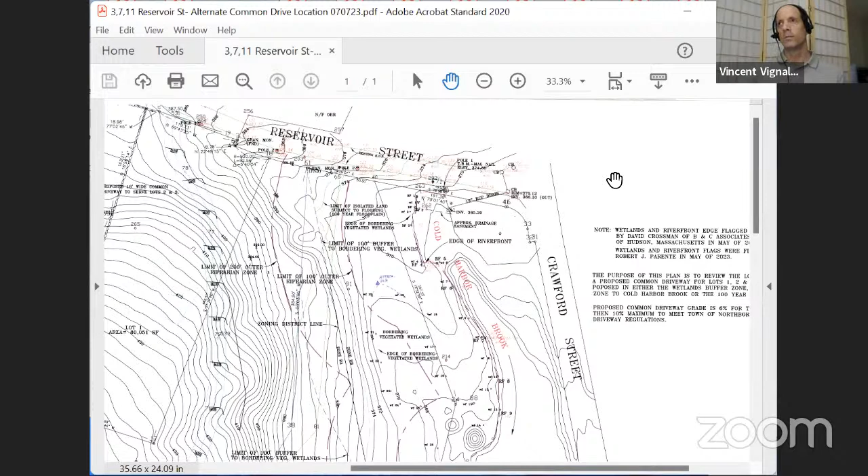The notification requirement is any abutters within 100 feet, so I'm not sure that 33 is within 100 feet of the corner here that I'm pointing to. He had a certified list of abutters submitted to the assessor's office, and it appeared that he made notice to all the people that were noted and required to be noticed. So you might just be 101 feet away, which would kind of pull you out.

Okay, yeah, I didn't realize it was that little of a distance. I'm probably close to 100, but probably over.

Does that answer your question, Clint? Yes, thank you. Okay, thank you.

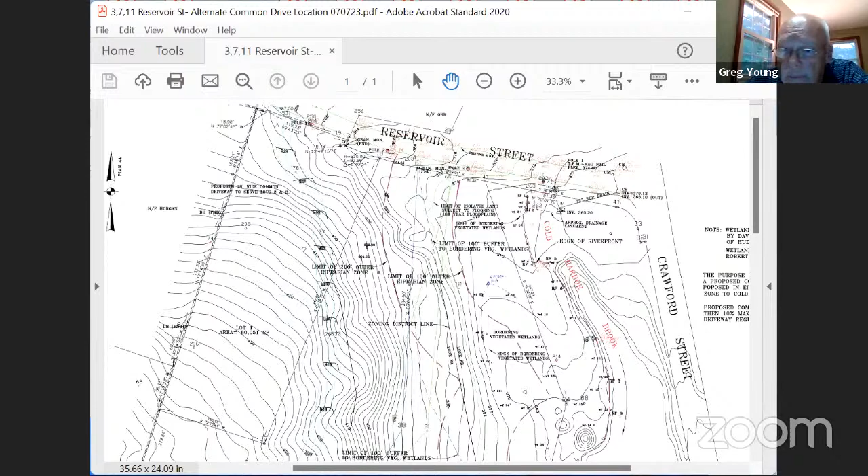Are you there? I am here. Okay, this is Santo Anzer, direct abutter at 25 Reservoir. My concerns are actually threefold.

One, I had sent an email requesting some more information on the project and I got no reply from the submitting party, so I didn't have a lot of information to talk about. But my concern is the amount of water we have on the hill, and an impermeable driveway going relatively close to where my septic system is. Right now I'm flooding my neighbor out during these storms. The water's running off this hill and literally running right through their house. This hill has a tremendous amount of water on it, as you just heard from Tracy. There's some plume runs which creates a major issue all winter long, and that road from Cliff's driveway to the corner of Crawford is solid ice all winter.

Adding another driveway at that grade without a way to deal with that water, which I'm sure at some point he'll have to figure out. The three driveways presently there, mine, Cliff's, and Tracy's, all run right into the road, and we have a sheet of ice all winter long there, creating a couple of accidents that have happened out here, plus a couple of very near accidents. So I think if the submitting party would at least talk to everybody involved, that will help this project move forward a little bit smoother, to try and figure out how to correct some of that issue.

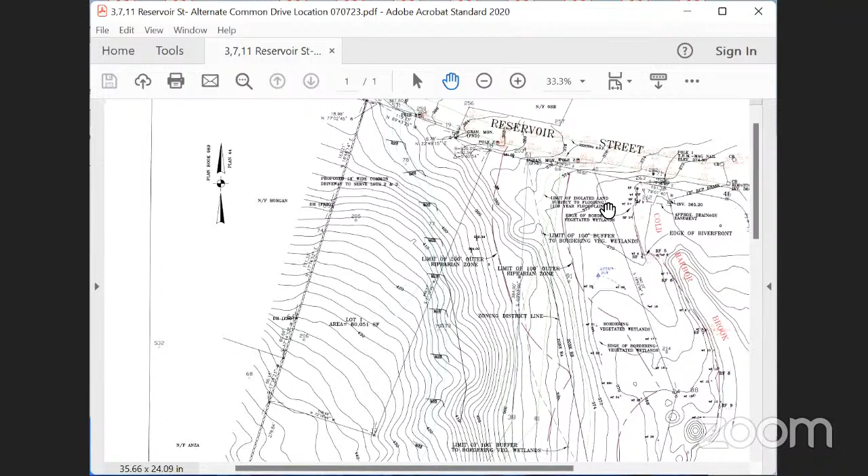Yep, exactly. Okay, alright, very good, very good. That's all I've got to say. Great, all set, Santo? I'm all set. Thank you. Very good, thank you.

Okay, no more hands? I got one more hand up. No, I think we're good. Let me double check - that's Santo's hand. Okay, Santo, take your hand down when you get a chance. Actually, I can do it from here. Alright, I think we're good then.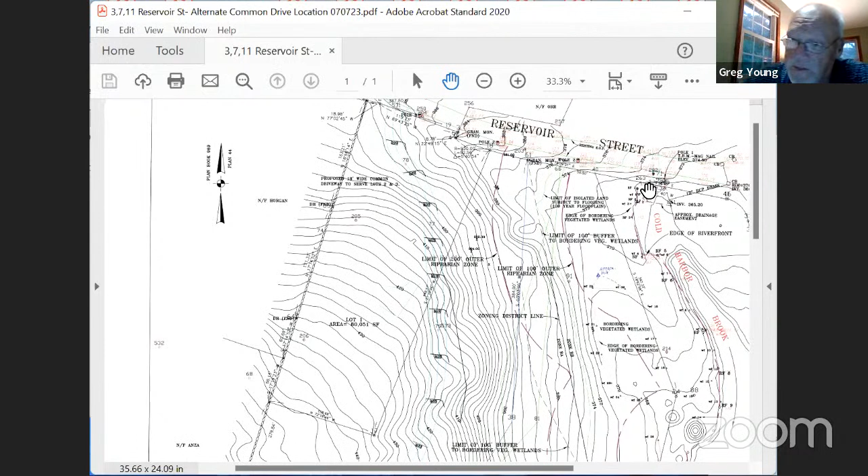Bob, I'm glad to hear you're reaching out. We've had some very positive, not surprisingly, outcomes when the developers and the engineers and the builders all reach out ahead of time to the abutters. All the problems are nipped in the bud, right? So that's a good process to start. Alright, off to a good start.

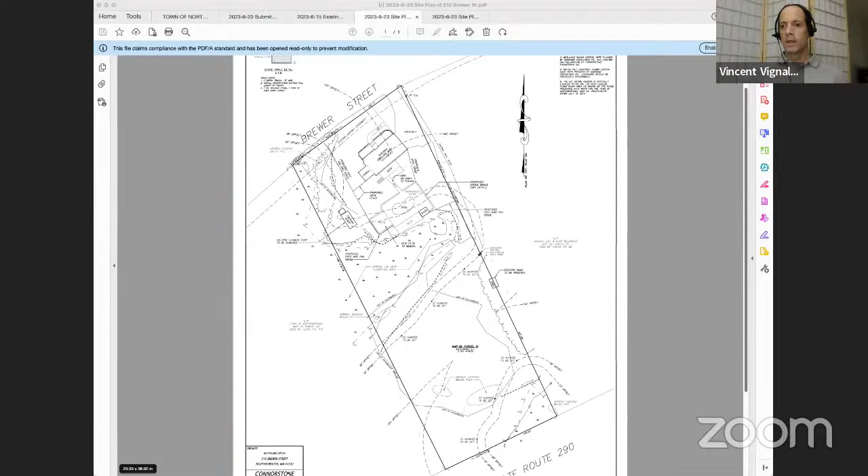Yeah, my only concern is you just explained that area down at the east end of the wetland is a lawn and exposed dirt section. I wouldn't want them getting down in there. Can you zoom into that image a little? Yeah, at this point most of the grass is already grown in this section. So he's really just looking to put it right where my cursor is circling here, and then over here, and then up in this area.

So would we want to hold off if he needs to access and remove the patio? I think he would just prefer to do it because he's been getting complaints from neighbors about it looking bad, and he's had problems with heavy rain and the exposed dirt not being able to stabilize. So having them spread the loam in just those areas and put down lawn seed might help stabilize it a bit, even if it gets a little messed up when they take the patio out.

I think Justin raises a good idea. When they go to take that patio out, that's a lot of work with big machines, so they're not going to drive over the walkway. They'll drive right along the west side of the house, I assume. But they have to watch out there because that's where the septic system is, so they'll have to be careful.

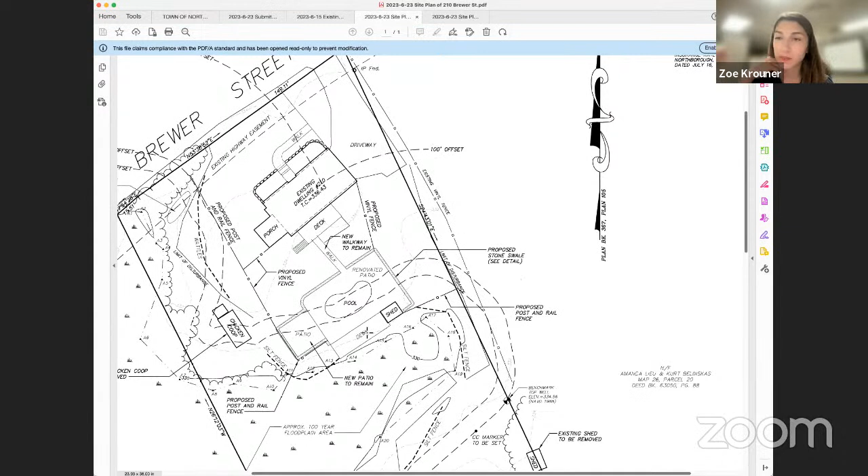I'm sorry, could you indicate where that was again? Outside the 25-foot buffer zone, if you want to follow that area. Put in a barrier from the apron of the pool over to that fence on the east side, and then probably some way to contain the area off to the west side of the house where it doesn't already have a sediment control line.

Can that barrier just be a wattle, since we're only talking about loam here? Can you repeat that? I didn't get that clearly. Can the control barrier be just a wattle and not a silt fence because of the loam? I'm not sure why you wouldn't want to go with the typical silt fence or wattle.

Putting a silt fence through the middle of the lawn— hopefully if he spreads the loam next week and seeds it and waters it with a sprinkler, he could have a lawn he could walk through, but then he's gonna have a silt fence right through the middle. So if he puts a wattle down, it's a lot easier to just pull the wattle up than to rip up the silt fence. That's why I was asking, because we're spreading loam here, we're not excavating, just spreading loam. It's not gonna wash much, and we've got grass all around it, so a wattle would protect it from moving at all.

If the commission's okay with it, I would go with a larger wattle, something bigger than the 6-inch, maybe 8-inch, so that you'll have enough since you're going to bury 2 inches. You want to have enough so it can store things, because that area off to the east side is where the slope goes down. There's a little channelized section, and if we get rains like we got the other day or earlier today, that loam material would be moving. Yeah, we can do 8 inches. Good.

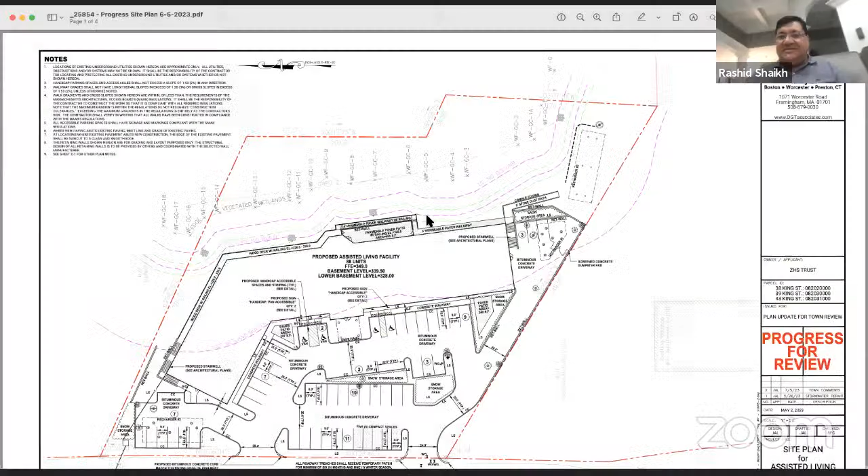Rashid, thanks for hanging in, it's been a long night. No, actually Mark is going to do the detail work here, but I'll just start by thanking you all for giving us another opportunity to talk about the same project. Honestly, it's almost embarrassing that years later we are still talking about preliminary stuff, but unfortunately things change, I guess. And again, we're talking informal discussion here only - it's informal discussion, correct. That's the reason I'm starting that way. So anyway, we're going to try to - Mark, you're breaking up. Let me just say a couple of statements, Mark, and then you come in and explain it. Okay, yeah, so basically what we want to say is that when we went in a few months ago thinking of getting the construction permit, we realized that there's a new bylaw for stormwater and land disturbance.

So we started following up on that, and I must appreciate Vince for giving us lots of insight. Honestly, usually we just go and apply and then take the feedback. But since Vince and Fred and everybody else were really forthcoming with updates and information, we ended up making lots of changes back and forth. Now we believe we're almost close to the finish line, so this might save the board's time. It was really Mark's idea to go for an informal meeting and incorporate some of that feedback, and hopefully at the next official meeting it'll be one and done. But without further ado, I'd like to have Mark go over and explain, and ask questions.

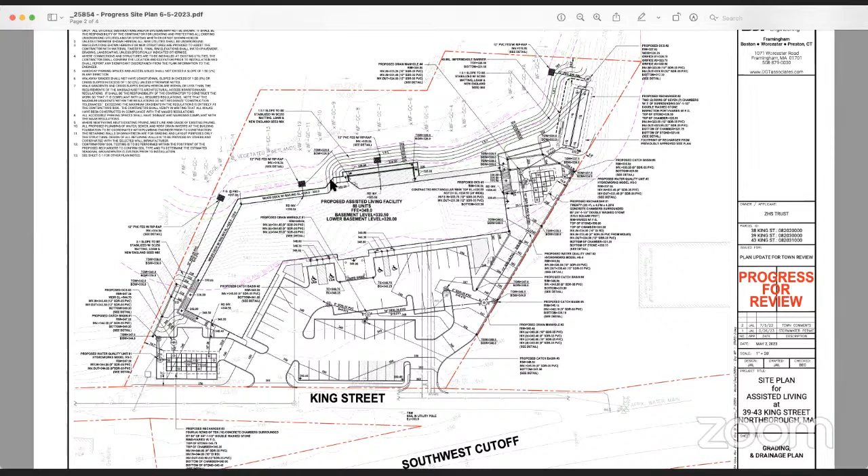Mark? Good evening, Mark Arnold with Goddard Consulting. Just a quick recap: this is an assisted living facility project approved several years ago. It still has an active order of conditions for construction. As Rashid mentioned, we now need to apply under the stormwater bylaw. As part of that, just to remind yourselves, the stormwater bylaw requires abutter notification, legal notification, and public hearings before the commission, very similar to what you'd see for an order of conditions. It's just a separate set of regulations, although they're still focused on the key question of runoff and impacts to the wetland itself.

So for the project as a whole, I'm going to walk through some changes, working from the wetlands outward. Basically, there is no change proposed to the limit of work—the original limit of work approved under the order of conditions remains the same. The changes that do happen in that 25-foot buffer are that we've actually reduced grading in the 25-foot buffer. That's by having a wooden deck, railing, and some patio space that we've worked in the back to eliminate grading, particularly in this back left corner.

Mark, can you increase the size of that a little bit? All right, I'm going to zoom in. So this back left-hand corner had grading all through this whole side slope. In this back area, the limit of work was along the 25-foot buffer when it was approved. So the grading in the 25-foot has been significantly reduced in that area. We have no change to the limit of work, we have reduced grading, and we have no structures or patios in the 25-foot.

There is some riprap that's been added really to clarify what the original plan showed, which was for these roof drains. These roof drains were shown in certain areas, and the plans now show the riprap to address velocity. So those are the changes in the 25-foot buffer: no change to the limit of work, reduced grading, and some additional stone at the stormwater overflow pipes. That's it for the 25-foot.

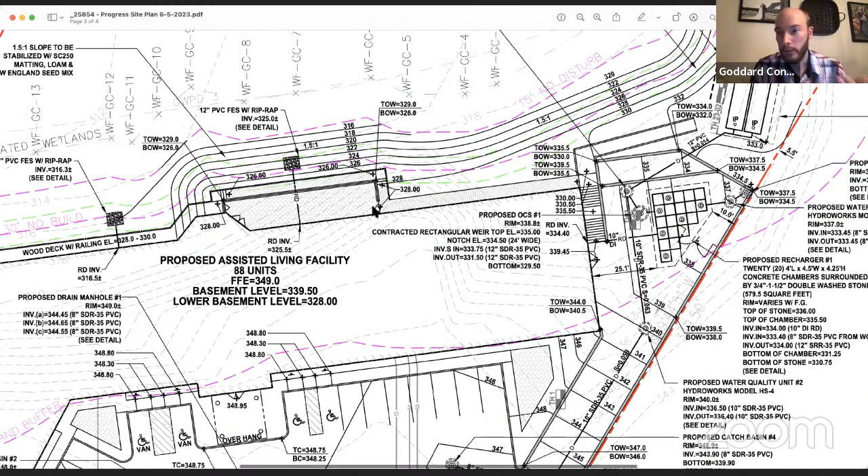Once this project goes through your stormwater bylaw, it will have superior stormwater management for all storms across the entire site than under the current order of conditions. So that's a huge benefit that's happening here.

Some retaining walls and other minor adjustments have happened in this area, but again, nothing inside the 25-foot. All this was in the limited disturbance, basically. So in all intents and purposes, not much of a change. The building location is not changing at all. Basically, the building is staying exactly where it is. We're not shifting it in any way, shape, or form.

That's really it from a summary standpoint. Not many changes. Our hope with the discussion is we have an order of conditions, and we think most of these changes are, one, beneficial to the wetlands, two, fairly minor, and three, we're going to be filing before this commission, notifying abutters, having a public hearing, and being legally notified about the process. So amending an order of conditions seems like a lot of extra paperwork for something that's going to happen with the complete review of the commission and complete review by the town engineer. The public will all be aware and notified about it. And if there is an issue, it can always be addressed then, particularly under that hearing process.

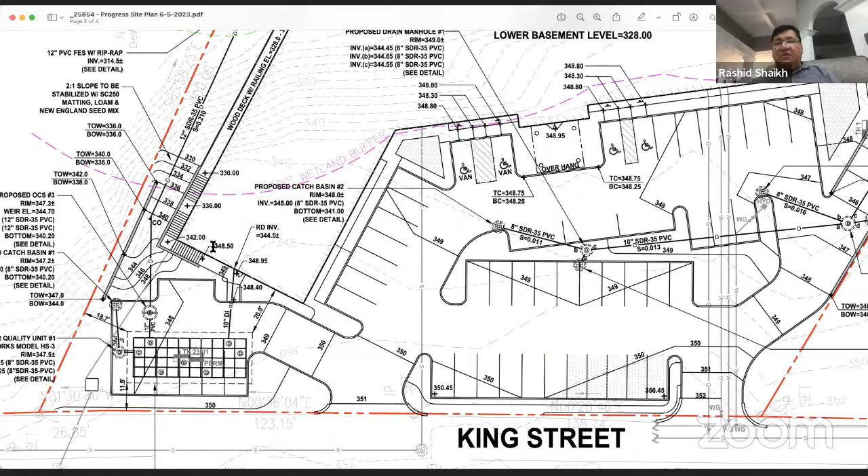This was not there before, and that's again to add more and to compensate for Atlas 14 and what have you. So actually that benefit that we're not taking water all the way on the one side, it's actually going in and it's kind of outside of the 100-foot buffer, I guess.

Is this the reason, Mark, you didn't mention? Yeah, it is outside the buffer zone, but you are right, it actually balances the stormwater on site. Instead of having the stormwater all go to one side, this is actually splitting the stormwater evenly across the site, which I think is also better from a stormwater discharge situation.

It is more construction cost wise, but we believe with all the feedback we have gotten from the town engineer, and especially from Vince, and we asked feedback from the town planner and building commissioner, and we had meetings with the fire chief as well. We got a lot of positive feedback, and we believe that this is a better, more stable site in the long run.

As you remember, in the original order of conditions, we did have a septic system in the front, which in the last meeting I updated you that we are taking that away, and now it will be a town sewer. That was discussed already in the last meeting.

So Rashid, the building itself, there's no change to the structure location? Zero. It's all around the outside and the back piece, as Mark explained, and all that. Yes, sir. Okay, and what about planning or ZBA, if they apply? Do we have to go back in front of them?

We are talking to them, because to be honest, I'm going to be open here. We had a few iterations, and somehow in one of the iterations, I don't know who did it or what happened, the building was moved a few feet, and everybody got alarmed with that. When I came to know, we put the building exactly where it was.

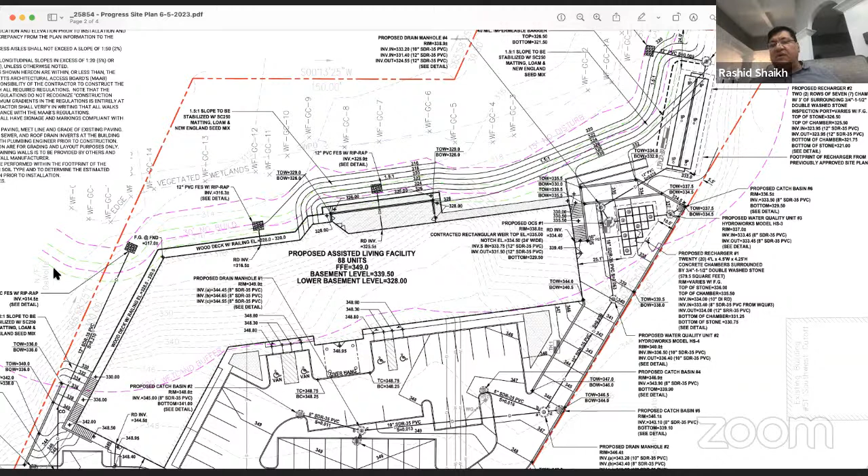There's no planning board here, there's only a special permit from ZBA, and we don't really believe that we have to go for any administrative change. There was a discussion of going for an administrative change if we were to move the building, but we're not moving the building. That was a mistake.

Okay. Questions from the commission, comments?

My comment is I'm recused from this particular subject matter because Mr. Shaikh has been a client of my firm from time to time.

I just have one comment on it. Just the roof drain leader that goes kind of right out the back. I think there's a 12-inch roof drain, actually the one to the right of that. Looks like it comes out kind of right in the middle of a 1.5 to 1 slope. I've just dealt with this on roof leaders on other projects. They get a lot of water that comes out of them, and that will probably lead to erosion down a 1.5 to 1 slope. So I'd probably just say if there's a way that we could take that out and bring it to the left-hand side, somewhere in that flat area, and create like a little plunge pool over there, I think it'll work a little better. But that's all I got.

That's a good input. Mark, would you agree? Yeah, I think that's a good catch. Yeah, I agree. Thank you.

We still have, I'm trying to remember, it's been a while since I was close to this project. Is there still a retaining wall in the backside? I don't remember there was anyone in the... Go ahead, Mark. I believe there was a wall on the right side here for this area.

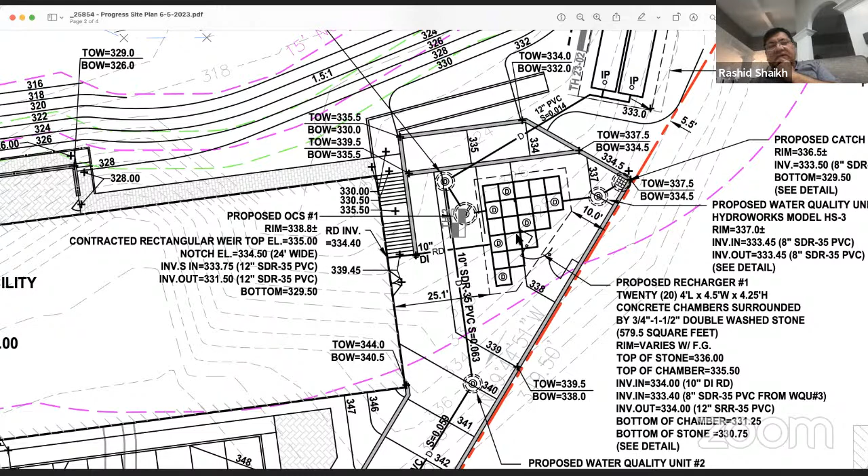Do you want to go on the left side, Mark? Yeah, we didn't do anything. There's a wall here just to pick up some grading. It was there before, I think it might have been there too. It just goes into the buffer zone just a little bit. I think that's just again to tighten up grading versus anything else.

The backside is what, riprap down the slope, or these slopes back here, you mean? Yes. I believe they were to be vegetated. Vegetation's okay.

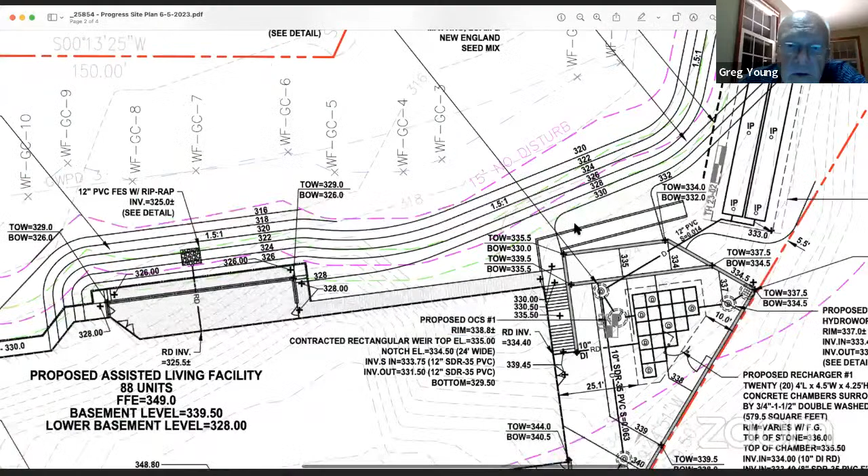So we've heard your comments earlier tonight about erosion control mats, so we'll make sure that we look into those notes, make sure that's there. And I think that's already in the order of conditions, the erosion control mats. There was a lot of discussion in the original order, I remember, and that's already in there, there we go.

More comments from the commission? Vinny, what's your thought on this one? I think it's an improvement, an overall improvement.

I don't know if there's significant changes relative to the wetlands. They're not getting any closer to the wetlands. The area over to the, I guess it's the northeast - I can't move your picture - yeah, to the left side of the drawing, they're not doing any of the grading that they had proposed. So that's a big improvement.

The point that Justin made is great about not having a discharge on a steep slope. 1.5 to 1 might be a little tight or a little steep for a regular jute net mat, and you may need to go to something stronger. I don't know what you normally use, but North American Green has a calculator that they use. Just submit enough information to show that wherever it's going to discharge, it's going to be stable.

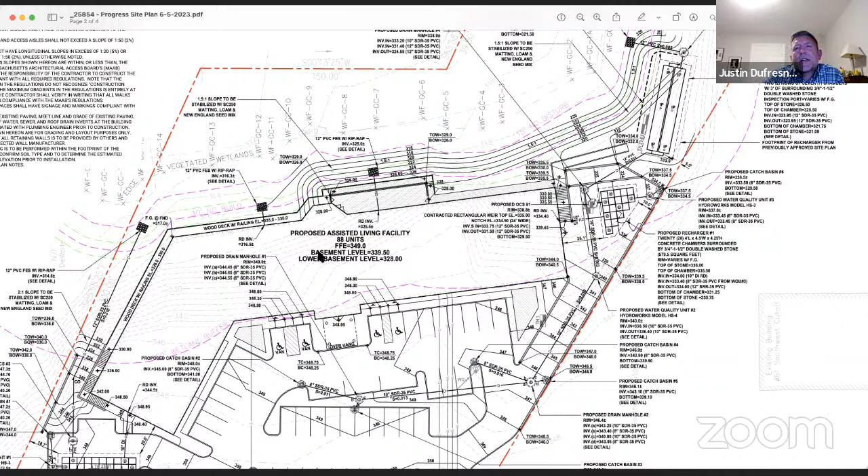Vinny, I think if I remember correctly, we did get in a lot of discussion about the slope back there, and I think they specified SC 250 matting. I remember us having a conversation around that particular erosion control, and that it was allowed for up to 1.5 to 1 slopes, and they submitted a bunch of documentation on that. So I think we hammered that home, because I remember us going back and forth as to riprap, or could we do it with this, and the engineer at the time really got pretty detailed on that matting that they were going to use.

Yeah, the 250 is great. That'll go to a 1-to-1. Awesome, so that's actually good. I think that's what we're using, and we were talking about 1-to-1 at that time, and I agree there was lots and lots of discussion. We actually had a couple of meetings on that, back and forth. So I think it's in part of the order.

I'm actually looking at the old plans that were approved, and I don't see a mat detail on it. But well, we can definitely do it. Yeah, in the as-built. Yep.

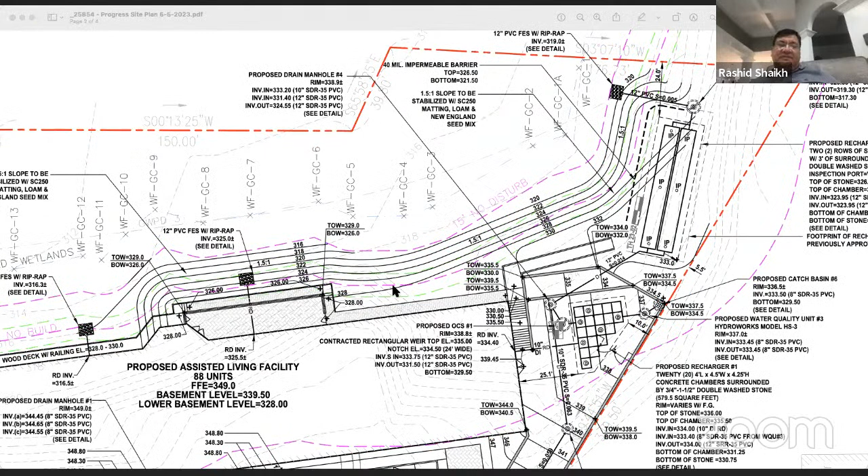Okay, anything else? So is the consensus with the commission that we do not need an amended OOC? We can deal with the changes through other existing channels? I'd say so. Yeah, I'd be okay with that. Same. Okay.

Thank you so much. So our plan is to submit that minor field change request along with our stormwater permit, so that way it'll happen the same hearing and follows everything, so it's all nice and concise for everyone. That way if the public wants to have comments when they're notified for the stormwater bylaw, they can also comment on any minor field change notes under the order. That way it's nice and concise and everything's on the table.

Great, great, thank you, Mark. I agree. Rashid, what was the final outcome for access around King Street and Route 20? What's going to happen there? It's the same exact... oh, can you go back, Mark? We are going through 38 King Street, and we gave easement to the town through 38 King Street. And actually, that's the reason it took a very, very long time to go through Mass DOT and get that approved.

You're going to go right across, blow right through that. That's correct, section there, that's correct. All right, all right, good. Just curious. Very good, thank you. Okay, yeah, actually the town has easement on 38 King Street for that reason. Thank you, Rashid, we'll see you again in a month or so. Yeah, we definitely want to close this. Looking forward to closing it. Okay, all right, great, thanks a lot.